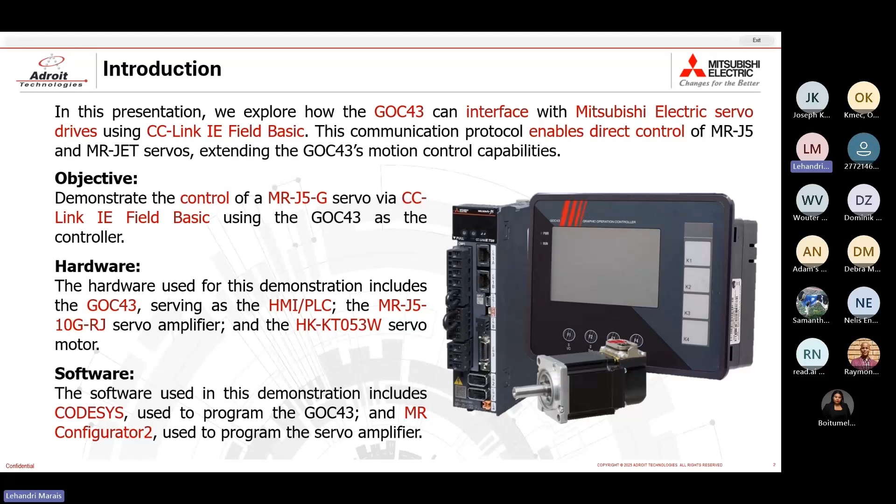The software that I'll be using today will be CODESYS and MR Configurator2, with CODESYS being used to program the GOC43 and MR Configurator2 used to parameterize our servo amplifier.

So just to give you an overview of the functionalities that we'll be adding to the demonstration today, we'll be adding the servo on command, jog forward and reverse commands of operation, home return command, positioning command via a positioning table. We're gonna be able to reset and clear alarms, and then monitoring things such as the position, operation mode, and alarms.

So just to start off with some overview on CC-Link IE Field Basic. CC-Link IE Field Basic is an industrial automation communication protocol that is based on standard Ethernet. It uses cyclic communication to transfer data between your master and your remote station using link devices. So link devices are basically just registers that are used to transfer or store the bits or registers that need to be transferred between the master and remote station.

On the right, you can see the diagram for the flow of data transfer of the link devices, and this will include your RX, RY, RWr, and RWw link devices. Your RX and RWr link devices are used to transfer bits and registers respectively from your remote station to your master station. So essentially it's reading from the remote station to the master station. Whereas the RY and RWw link devices are used to transfer bits and registers from your master station to your remote station.

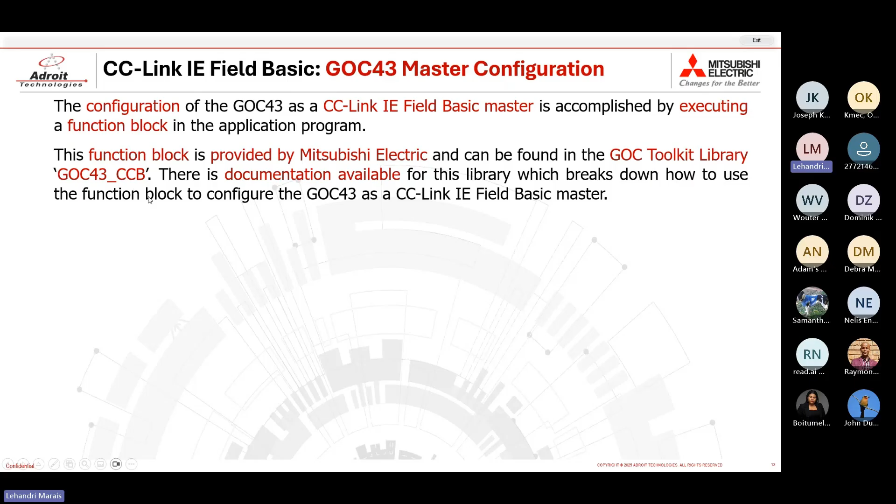So when looking at how to configure the GOC as a CC-Link IE Field Basic master, this is done via a function block. The function block is provided by Mitsubishi Electric within the GOC toolkit library, and it is the GOC43_CCB library. So in your install for CODESYS, you'll see the GOC Toolkit v3 folder in which you'll find manuals and library manuals. There you can also see the documentation on how to use this function block to configure the CC-Link IE Field master station.

So starting off, let's actually go over to CODESYS. Just give me a second.

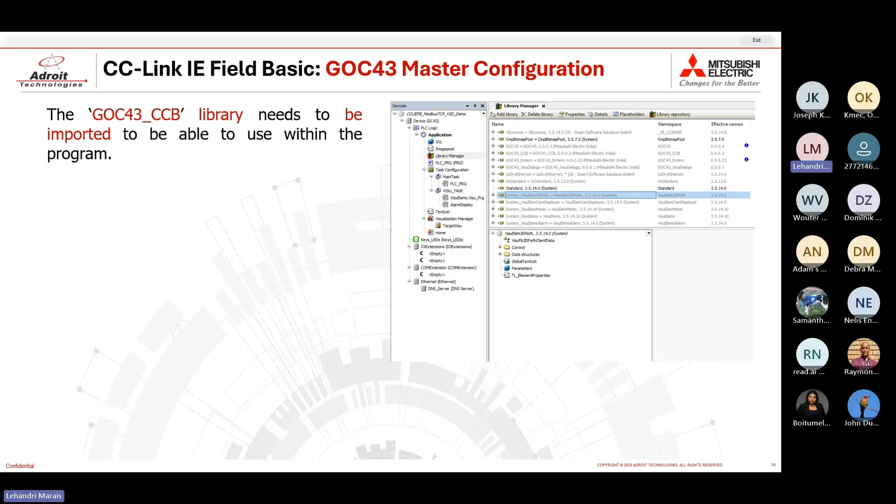Okay. So starting off with importing the function block, you open the library manager in your device tree, right click within the window, anywhere is fine, select add library, then this pop-up window comes up, go to advanced, miscellaneous, and then you'll see the GOC43_CCB library. This is the function block for the CC-Link IE Field Basic master configuration. Clicking OK will now import this to my program.

So once you have imported this to your program, you are able to use it within your program. So I actually have set up the configuration beforehand, as I will be going through the presentation breakdown as it's a bit easier.

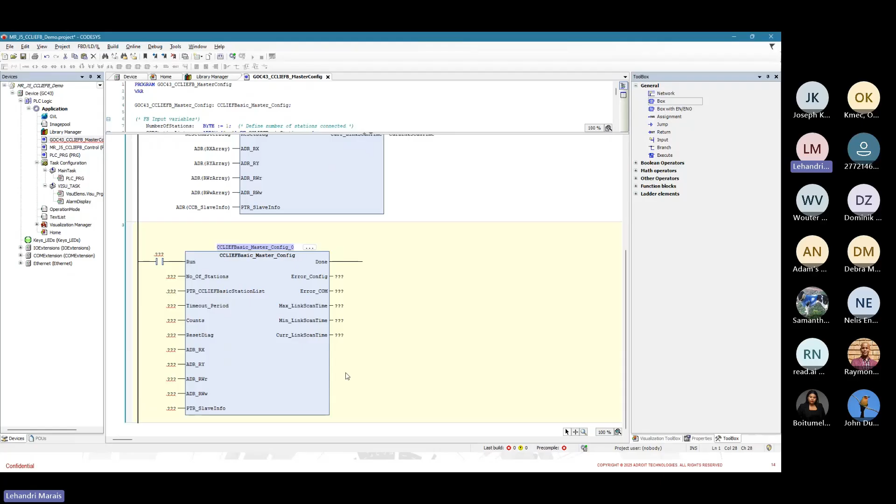But yeah, so if you do import your function block, you do it by dragging and dropping a box, clicking on the box itself, going to the action button, which brings up your input assistant, in which you can select the function blocks tab, and then you should be able to see the library that you have imported. So if I click OK there, I have now imported the function block once again.

Note, you only require one of these function blocks for your GOC43, as one of these function blocks can support up to 4 remote stations. So just quickly going back to the presentation. So this is just the steps for the library and adding the function block that I just showed you.

Now, looking at how to configure the function block, we start off with our inputs, and the first input being run. So this just enables the function block to set up the communication. Whenever this input is false, communication is stopped to all remote stations.

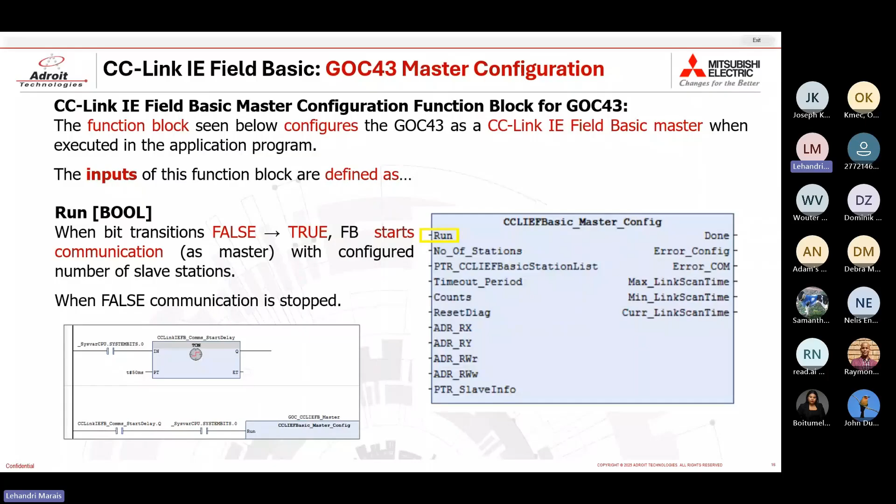Next is the number of stations. So this is where you set up the number of slave devices or remote stations that you are connecting to the GOC. As mentioned, the range is 1 to 4. Do not exceed 4, as this will cause errors.

Next is the CC-Link IE Field Basic station list. This also configures your stations, but this configures the IP address, or, well, more like the station number of each of your remote stations. So the way to declare this is via the array or a pointer to an array, the declaration which you can see at the bottom here.

So one thing to note about this input, the station number is equal to your remote station's fourth octet of its IP address. So if I look at, let's say, an example of 192.168.3.9 being the remote station's IP address, this will mean that I need to set 9 as its station number in this declaration. So that needs to be input into this input of the function block.

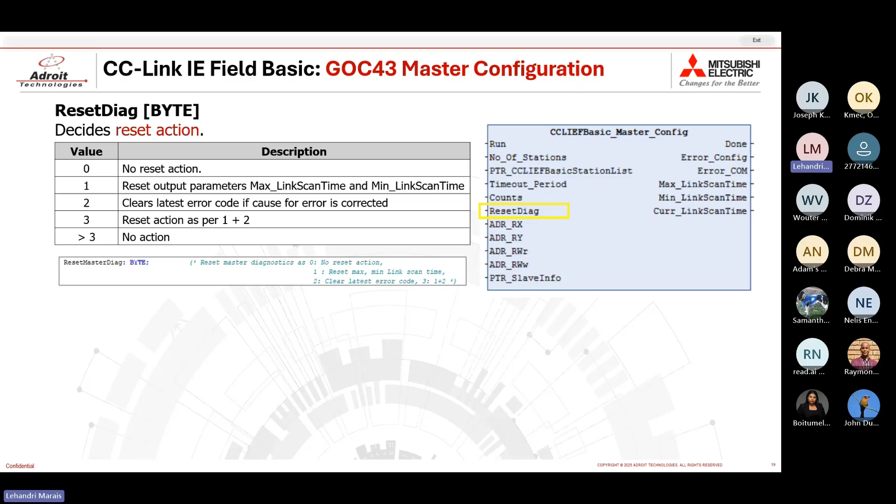Next is where you declare the starting addresses for your link devices. So if you recall, I mentioned that the link devices are declared by the user, and this is where you do it. So this declares the starting address of your RX, RY, RWr, and RWw. Now keep in mind that each of these have a set amount of link devices assigned per station. So if I have multiple stations, I need to leave enough space for my addresses so that all of these stations' addresses fit in the ranges that I set here.

So for instance, if I set my RX starting address as %MB3000, if let's say I have the maximum 4 connections, I need to keep space for 64 times 4 bits, which is pretty easy. But yeah, so that needs to be kept in mind for all 4 of these addresses. But for today, we only have one remote station, so that is not really a problem, although the addressing here is also declared pretty spaciously.

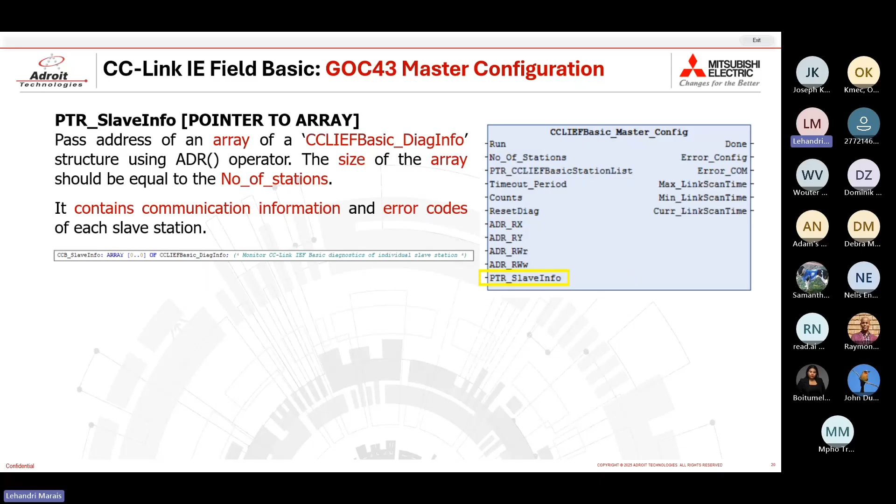Okay. Next is the slave info. So this is a pointer to a structure or array that stores diagnostics of the slave station, and some information as well. So this includes vendor code, model code, device version, slave local unit info. Yeah, quite a few things. It can store the error code. It can store comms error.

So you can use this information to determine which of your slaves are in error and determine whether you need to check any communication cables or the configuration itself.

Now, going to the outputs of this function block, the first is the done output. So this is a Boolean type output. And this is where you can see whether the configuration has been successful. So when this is true, the configuration has been successful, and when this is false, an error has occurred for the configuration.

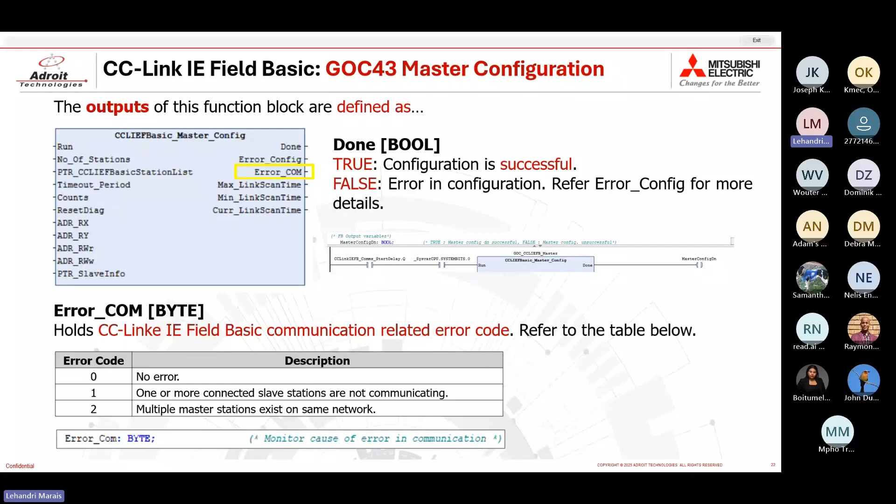Now, when an error has occurred, you'll see the error code in the error_com. So the error code will indicate what type of error has occurred. If error_com is 0, then no error has occurred. When it's 1, one or more connected slave stations are not communicating. And if it's 2, multiple master stations exist on the same network.

Now going to the error config. This also gives you a bit more indication on what error could have possibly occurred for the done output to be false. So the first option for this is 0, no error. 1, station number is invalid. So that means you've selected a station number out of range. 2, address overlaps or out of memory area assigned marker memory.

If the error code is 3, the number of slave stations or number of occupied stations is out of range. 4, same station number configured for more than one slave. So that means most likely you also have a duplicate IP address for 2 of your slaves or remote stations. When it's 5, your master station IP address matches with one of the slave stations. 6 to 7 is reserved.

8 means that the count value is anything else other than 3, 5, or 10. And 10 means that the master function block is already configured. So that means you have configured more than one master block for your GOC.

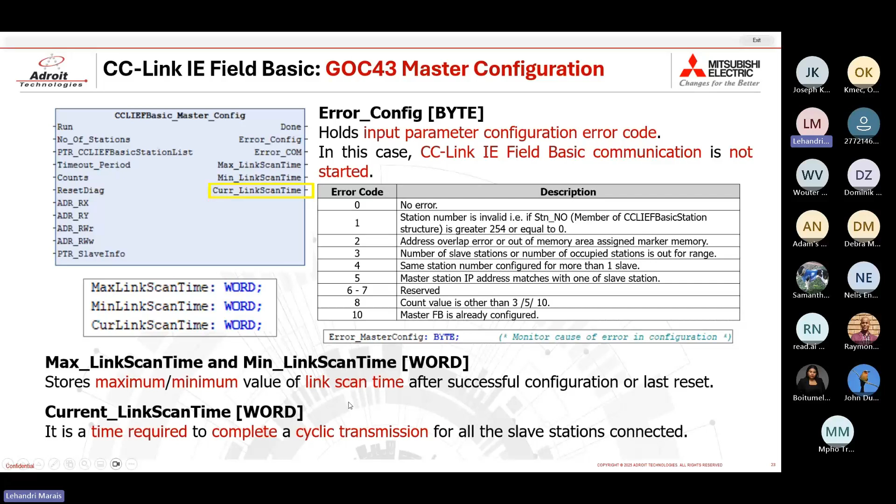So when declared, this is approximately how your variables declaration for the function block should look. And this has all been done within the last few slides. And this is approximately how your function block should look when configured.

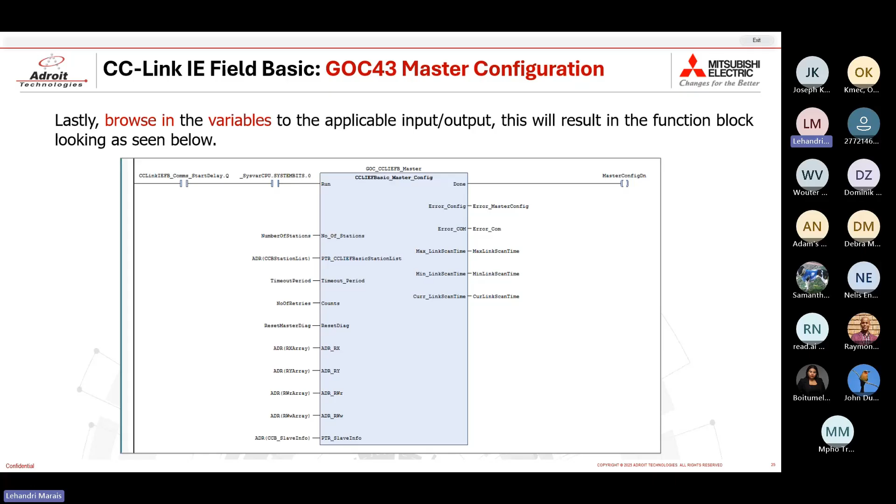Okay. So now that we've discussed the configuration for the GOC for CC-Link IE Field Basic, let's look at the MR-J5. So as stated, we are using the MR-J5-10G-RJ servo amplifier for this demonstration. And this servo amplifier forms part of the MR-J servo range, which is one of the newest ranges. The G-type servo amplifier of this MR-J5 range supports CC-Link IE TSN as well as CC-Link IE Field Basic communication for the servo motor control.

So the G-type MR-J5 servo amplifier comes in a 1, 2, or 3 axis configuration, but just a special note for CC-Link IE Field Basic, there's only a single axis available. And if we look more into the exact model being used for today's demonstration, the servo amplifier is a single axis servo amplifier that has a rated output of 0.1 kilowatts. You can see the model designation on the right hand side.

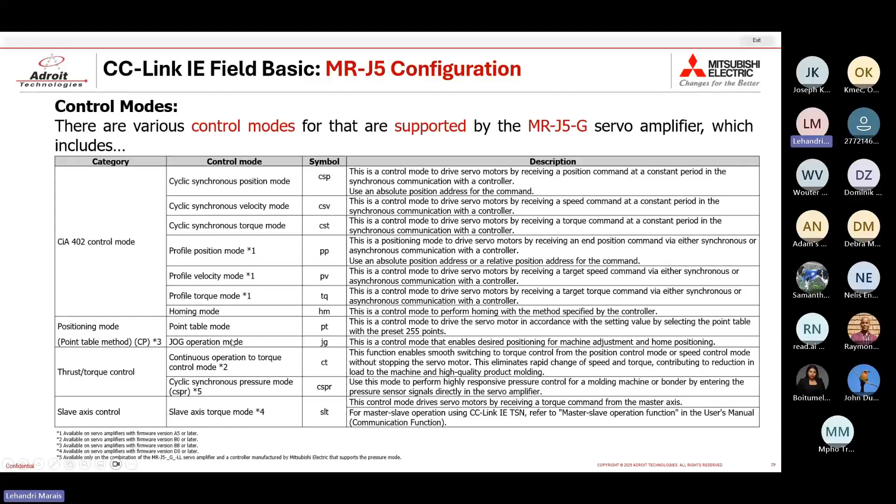You won't be able to use those in your operation. So when it comes to control modes that the MR-J5-G does support for CC-Link IE Field Basic, this includes the profile position mode, the profile velocity mode, profile torque mode, homing mode, point table mode, and jog operation mode that you can see here.

Now, the servo amplifier uses parameters much like a VSD to configure its operation, and this is done via MR Configurator2. So before we go on, just gonna quickly open MR Configurator. Okay.

So when it comes to the network parameterization for the MR-J5-G, we will have to look at setting the IP address, subnet mask, network protocol setting, and in some cases, the communication speed. This is because this determines the characteristics of communication between your controller and your servo amplifier, in which case we want to set CC-Link IE Field Basic. We need to set an IP address as well as a subnet mask.

So for the IP address, there's actually two methods of setting your IP address. The first being the rotary switches on the front display of your servo amplifier, which you can see an image right here. So switch 1 and switch 2 can be used to set the fourth octet of your servo amplifier IP address, with octets 1, 2 and 3 being taken from the parameter of the servo amplifier, which by default is usually 192.168.3.1. So one thing to note, if both your rotary switches are set to 0, the default IP address within the parameter will be used.

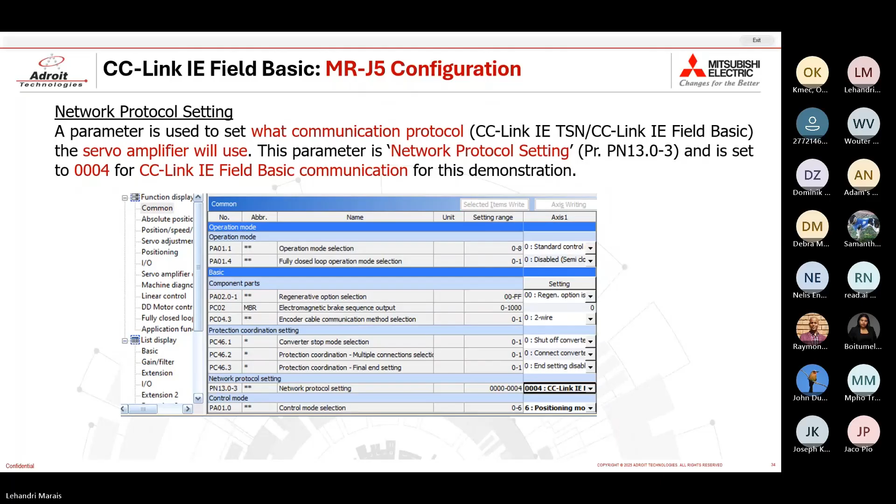So the next parameter that needs to be set is the network protocol setting. This is where we set whether to use CC-Link IE Field Basic or CC-Link IE TSN. Now this is set in parameter PN13, bits 0 to 3, and to do this you need to set 0004, or if you just go to your parameter list common, you should have this option under network protocol setting where you are able to choose between the two. So the protocol set for this will be CC-Link IE Field Basic.

So the communication speed setting parameter is actually not necessarily applicable for this demonstration, but it's important to keep in mind when using CC-Link IE TSN, as this determines whether you're using 100 megabits per second or 1 gigabit per second communication speed when using TSN. But for CC-Link IE Field Basic, regardless of the value of this parameter, it will stay at 100 megabits per second.

And just a note, whenever any of these parameters have been changed, the parameters need to be written. So first go online via an Ethernet or USB connection to the servo amplifier and click on switch online/offline, and then select axis writing, which will then write the parameters to your axis. Once the writing has been completed, cycle the power of the servo amplifier for the parameter changes to take place.

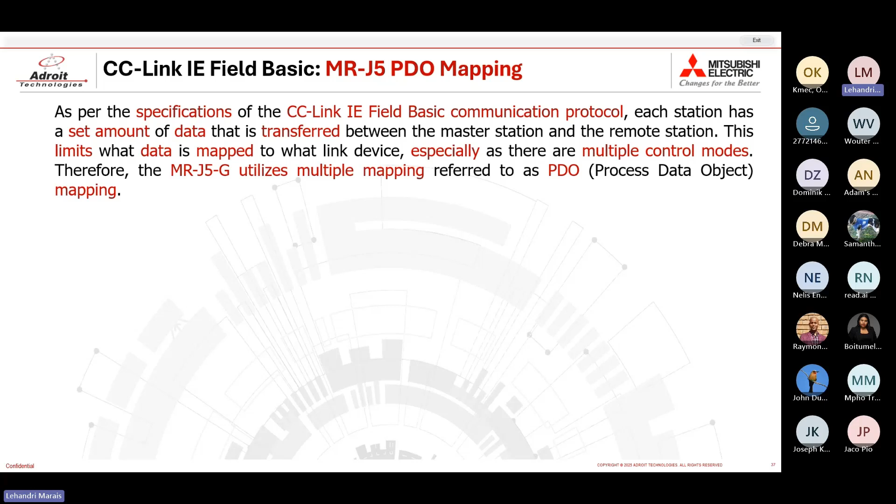So next, we're going to look at the MR-J5 PDO mapping. When I say PDO mapping, this is how the link devices for CC-Link IE Field Basic are mapped for the MR-J5. So this looks at the mapping of RY, RX, RWw, and RWr. For your RX and RY link device mapping, this stays constant no matter what control mode or operation mode you choose. But the RWw and RWr mapping changes depending on the control mode or operation mode that you choose. And we'll be going through the different types in a second.

But first, looking at RY and RX, RY is mainly used to start the cyclic communication. So you'll see RY, in this case 3F for a single station, is your cyclic communication ready command. Whereas your RX 3F will be the cyclic communication ready status. So that's what you'll be reading from the remote station, or the servo amplifier in this case.

Now, to go on to the RWR and RWW link devices, as I said, these do change depending on what is set in your control mode selection parameter and your default mapping mode selection. So these are two parameters in your servo amplifier that determine what control mode you are able to use and what mapping mode selection. So to give a bit more clarity, your control modes that are available for CC-Link IE Field Basic are the network standard mode and the positioning mode or point table method.

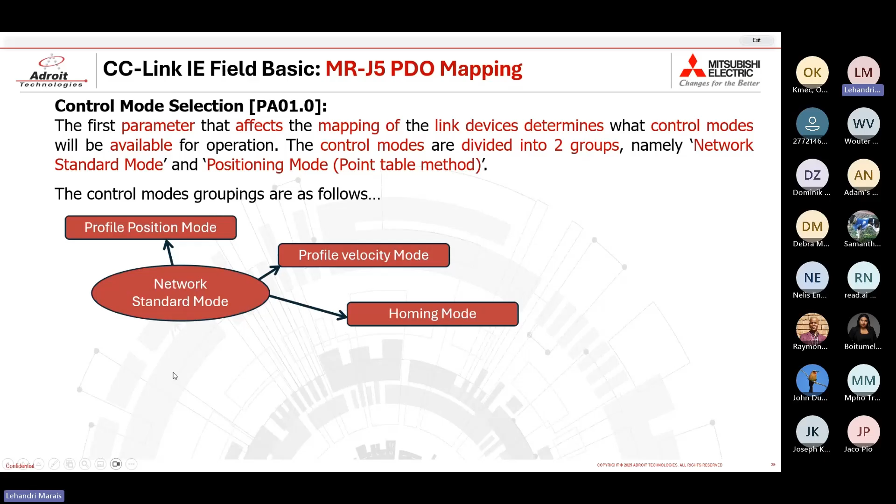And next, the default mapping mode selection determines whether you are using 2 touch probes, 1 touch probe, or 1 touch probe and an input device. So that ultimately determines how your link devices are mapped. So when it comes to your control mode selections, how your control modes are grouped within these two categories, you have once again your network standard mode, which allows you to do profile position mode, profile velocity mode, homing mode, and last but not least, profile torque mode.

Now, the other category is the positioning mode. This allows you to do jog mode, homing mode, and point table mode. So only one of these two groups can be set on the amplifier at any given time. So whatever you choose, you are limited to the control modes that group has access to. So how this actually works is you can change between these two groups during operation via an SLMP signal.

However, this is something that the GOC does not support, but if you are, let's say, using the FX5, you will be able to switch between these two modes. But for the GOC application, this is not possible. So you will need to choose one of these two modes for the operation that you want to perform. And then, as I said, the default mapping mode is just to determine what peripherals or input devices or probes you have connected to your servo amplifier.

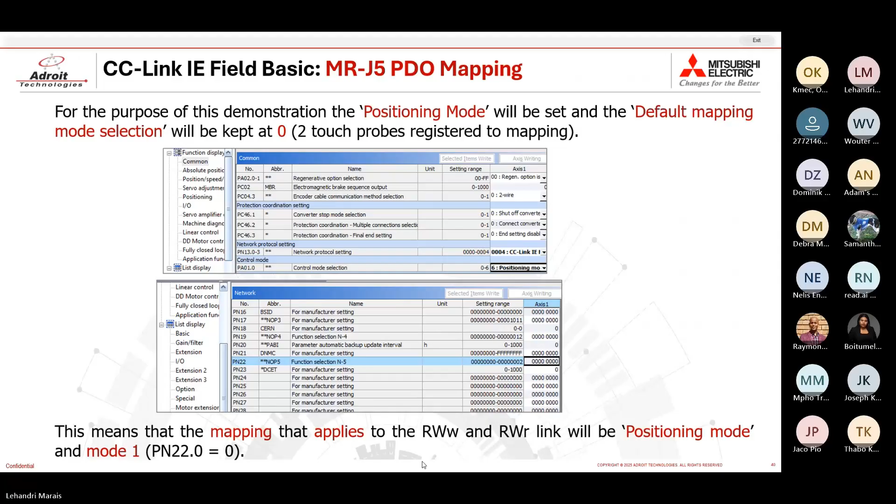So now looking at what this means for our mapping, and just note that this is specifically for positioning mode, for mode 1. And I'll show you in the manual as well that there are various tables just like this one. So when it comes to the RWW PDO mapping, we have register 0 being the modes of operation, register 1 being the control word, and then we have some control digital inputs. Register 6 is your target position, which is something that will be used quite a bit. Register 8 is the target velocity.

Then you also have your velocity limit value, your target torque, profile velocity, profile acceleration, profile deceleration, torque slope, and so on and so forth. So this is important to know because these are the actual registers that you'll be using within your PLC program. When it comes to the RWR PDO mapping, you also have a modes of operation display, so you can monitor what mode of operation the servo amplifier is currently in, and then you have your status word. And just looking at what we'll be using today, the position actual value, so you can track what position your servo motor is in, your following error actual value, your current alarm, and so on and so forth.

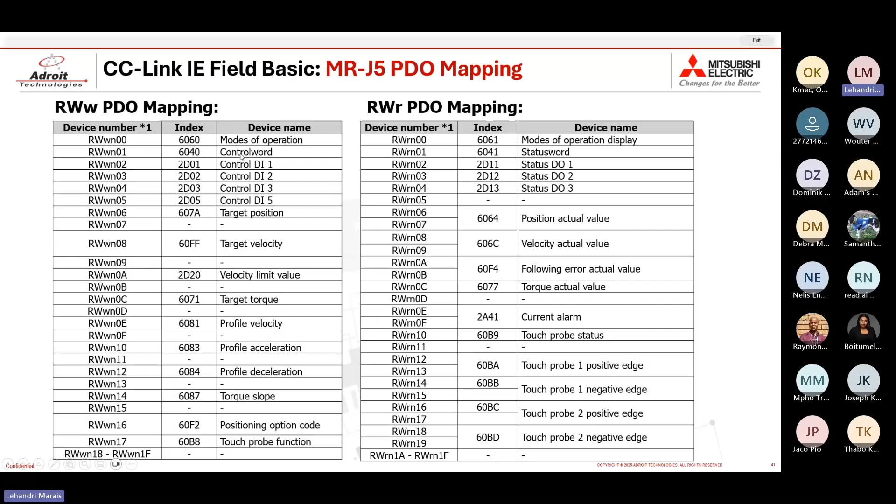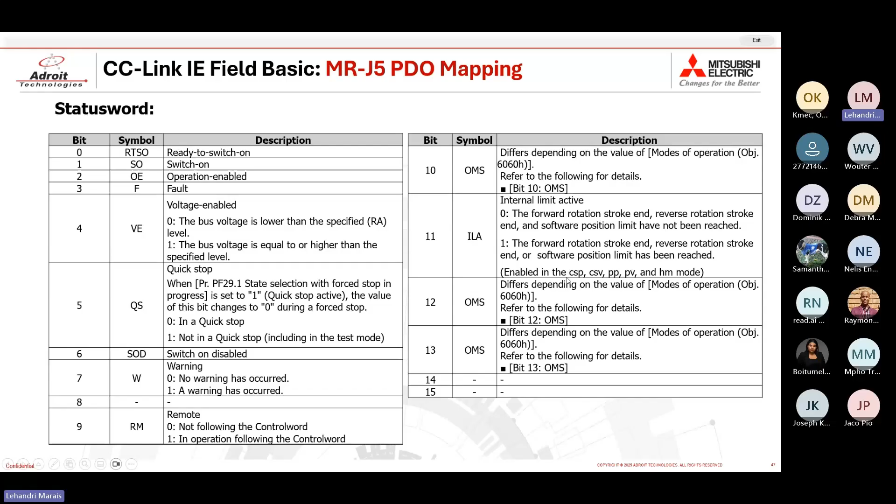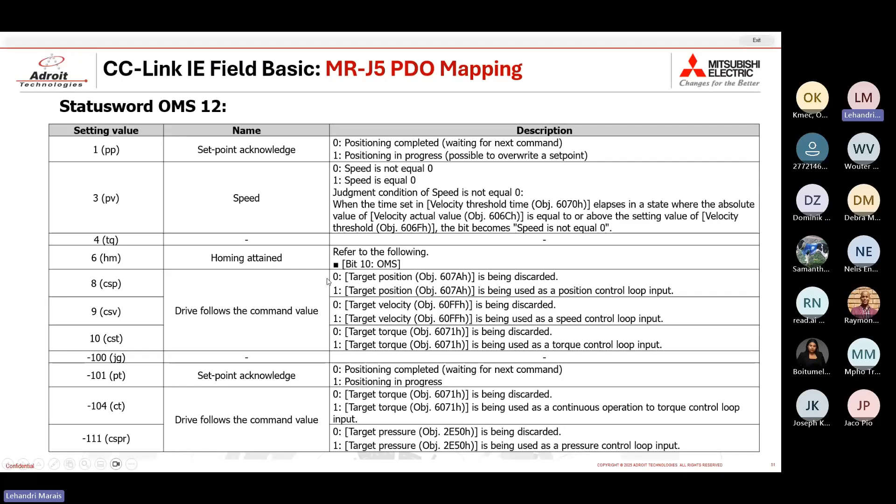Okay. Same for operation mode specific bit 12 for your status word. When looking at the point table method, this indicates whether the set point has been acknowledged, and this is not applicable for jog, but it is applicable for homing, which depends on the information you see in operation mode specific bit 10. Okay, so that is the configuration for both your PLC and the servo amplifier for CC-Link IE Field Basic.

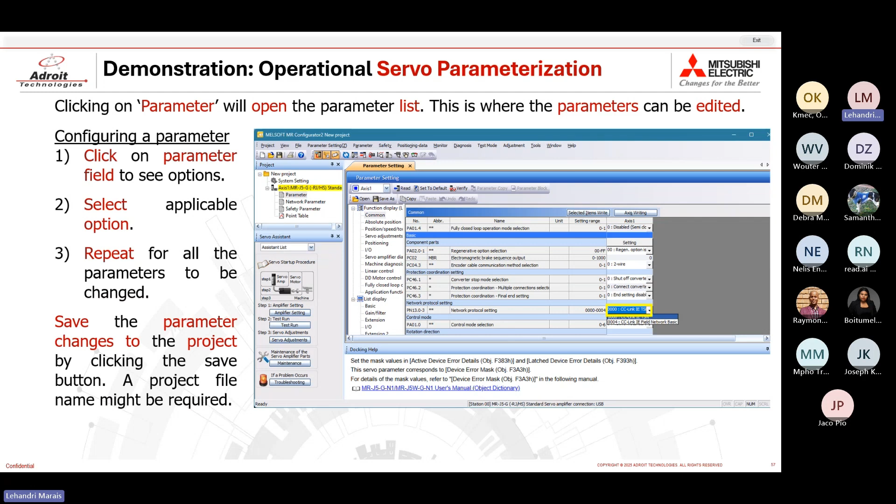Now, starting to look at the demonstration, we'll look at some of the servo parameters that don't necessarily affect the CC-Link IE Field Basic communication protocol, but that are necessary for your servo to operate as you intend it to. Now, obviously, this is very much dependent on the application that the motor is going to be used in. So the parameters that I set here will not necessarily be used for all applications.

So the first parameter that will be set is the forced stop parameter. I do not have a forced stop wired into my servo amplifier, meaning that I need to disable this functionality, and this is done by setting disable in parameter PA04.2 and PA04.3. So if I go to my MR Configurator, you'll see that the forced stop selection is disabled in both 4.3 and 4.2. If this is not done and there is no forced stop wired in, the servo amplifier will remain in an error state.

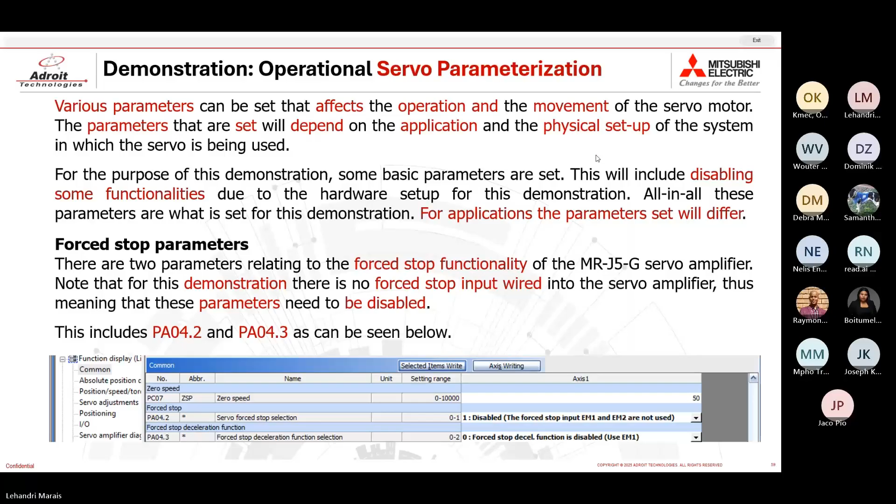Next is the operation mode selection. You have three types of servo motors: a standard rotary servo motor, a linear servo motor, and a direct drive servo motor. For this demonstration, we have a standard rotary motor, and this parameter is where you set what type of motor you use. So in parameter PA01.1, we keep it on the default, which is standard control. If I expand, you can see you are able to choose between linear, direct drive, or standard control mode.

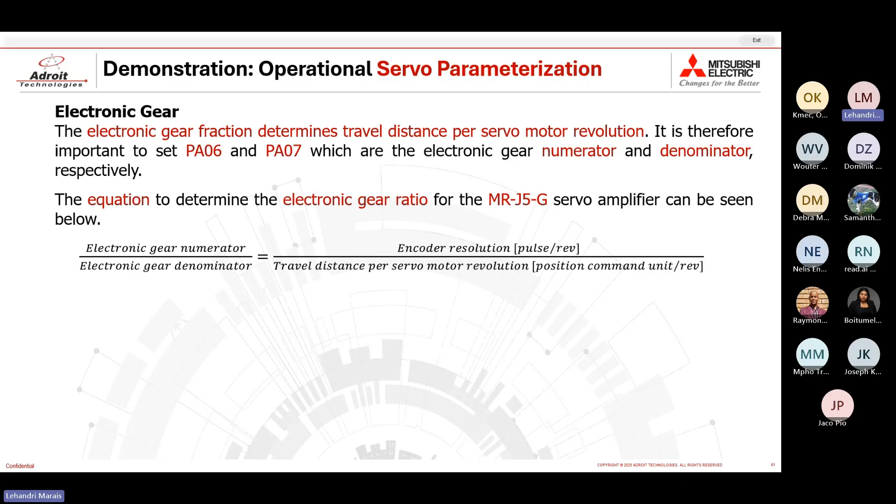One of the more important parameters to set is the electronic gear parameters. So this will be your electronic gear numerator as well as the denominator, which is parameter PA06 and PA07. Now, your electronic gear ratio determines the travel distance per servo motor revolution. So this is important to set how you would like it to function.

Now, the equation used to determine your electronic gear ratio can be seen. It's the encoder resolution over the travel distance per servo motor revolution. So one thing else to note on this, the unit in which your travel distance is measured will depend on what is set in parameter PT01.2, as this determines the unit for position data.

So for this demonstration, we are currently using pulses. But you are able to set this in millimeters, inches, or degrees. So your gear ratio will also depend on what you have set there.

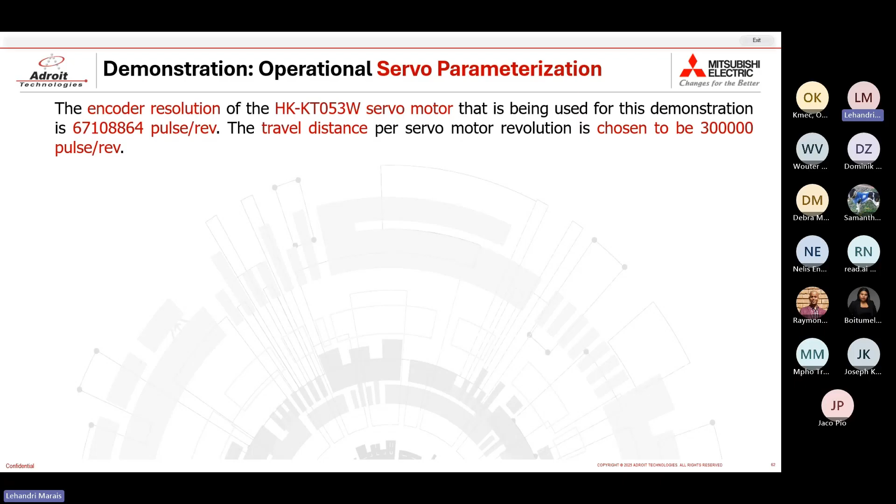So the encoder resolution for the motor that's been used for this demonstration is 67,108,864 pulses per revolution. And the travel distance for a full motor rotation that is chosen is 300,000 pulses. This means that for every 300,000 pulses that I give my servo motor, its axis will rotate once, thus meaning that my electronic gear ratio will be as follows, as you can see on this screen.

And this is set in PA06 and PA07, which if I just show you, yeah, right here. So that is the electronic gear ratio.

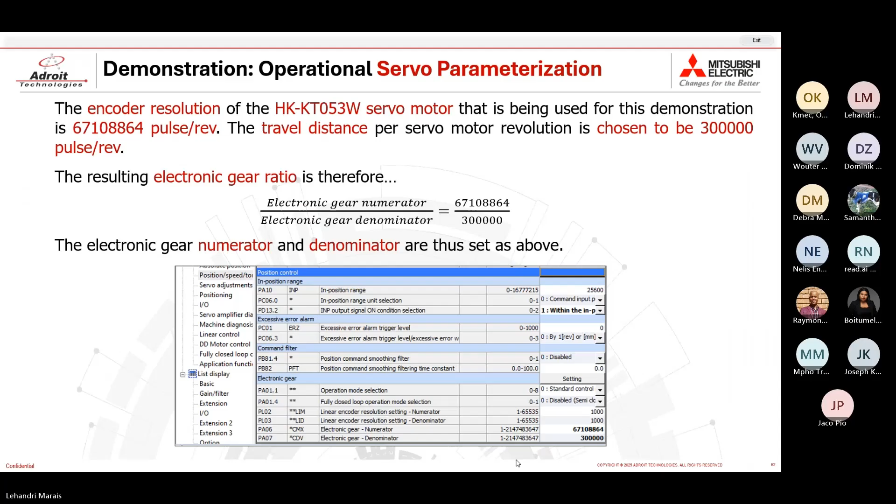Now, there is a parameter that relates to how the homing method works, and this is parameter PT45. For this demonstration, it's set to -3 data set type, which means that the homing is done without a dog, as I don't have any dog proximity sensor connected to the servo amplifier. And this also means that when the home position command is executed, the current position is set as the home position. Also, just to show, this is set right here.

So there actually are quite a few options for this, and it will also depend on what peripherals you have on your servo amplifier. Now, if you are ever working on MR Configurator and you're not sure what the different parameter settings mean, you also have a docking help at the bottom. So whatever parameter I do click on, I can go read up more on the different options for settings for this parameter.

So last but not least is the in-position output signal on condition selection. This determines under what condition the in-position signal turns on, which for this case will be set to 1, meaning within the in-position range and at completion of output command. So this means my in-position signal will turn on when it's within a certain range of my position, as well as the completion of the output command itself.

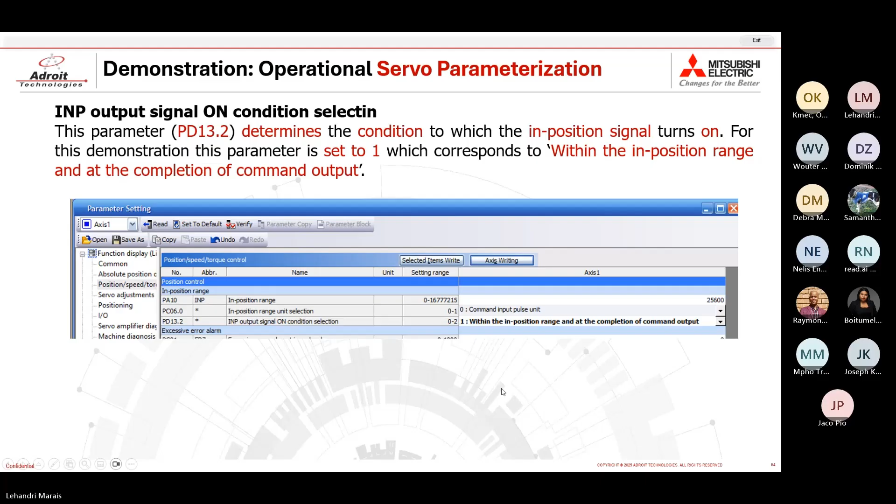Now, as I mentioned, the control mode that we'll be using for today's demonstration will be the point table. So this means that the point table needs to be configured as well. So to access your point table, go to the project tree in the project window and double click on point table. This will open this interface you see right here.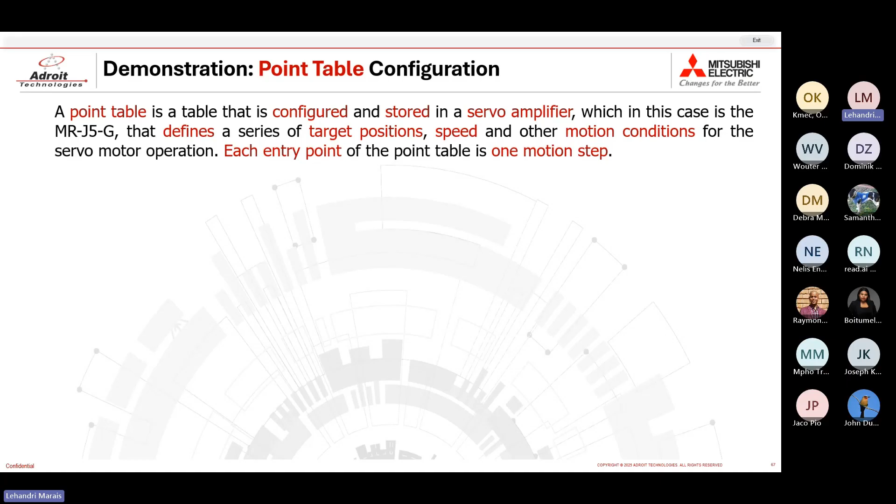So a point table is configured and stored within your servo amplifier, and this point table defines a series of target positions with speed and motion conditions that determine the servo motor operation. Each entry point or each row in the point table is one motion step. So I did show you where to access the point table in MR Configurator, which you can also see here.

Now, looking at what you configure in each of the columns of your point table. The first is your target position. So this is the position that you want the servo motor to move to, so the axis to turn. This, once again, will be in terms of pulses, as this is what has been set in my parameters.

So if I look at the first entry here, I am instructing the servo motor to rotate 100,000 pulses in the positive direction or forward direction, which for this setup should be counterclockwise. I do mention this a bit later on, so we will get to that as well.

The second column sets the speed of the operation. So if I once again look at entry 1, moving this 100,000 pulses, the servo motor will move at the speed of 100 RPM. Next is the acceleration time constant. This determines how long it will take the motor to reach the speed that is set in the speed column.

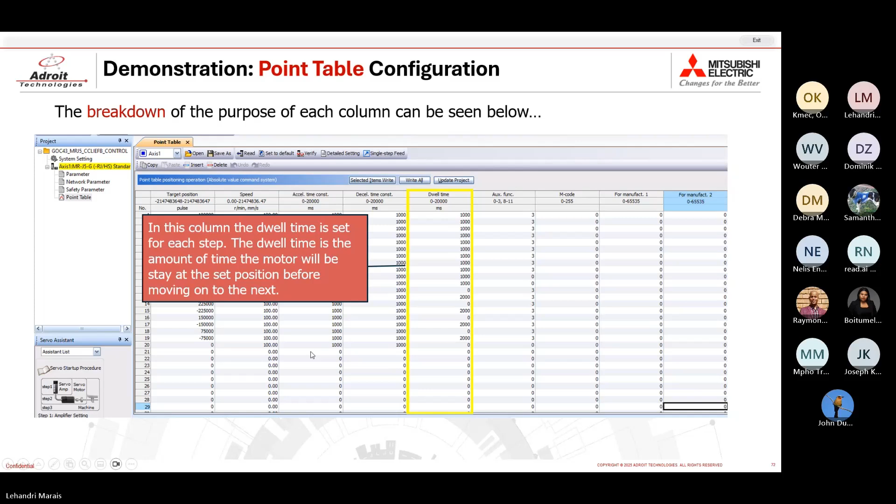Second last is the auxiliary function. The auxiliary function determines the motion operation, whether it continues or stops at this entry. So if I look at my setup, when using the point table in absolute position command method, which is what we are currently doing, when setting 2 as your auxiliary function, operation is performed in accordance with a single point table selected. This means only one position or point will be executed at a time, so it will not automatically go on to the next point.

With 3 set, it automatically moves to the next point without me having to input anything else. The same for 10 and 11, although there are slight changes between them. The last column that you can edit is the M-code. This is basically where you set an M-code for the table or row entry.

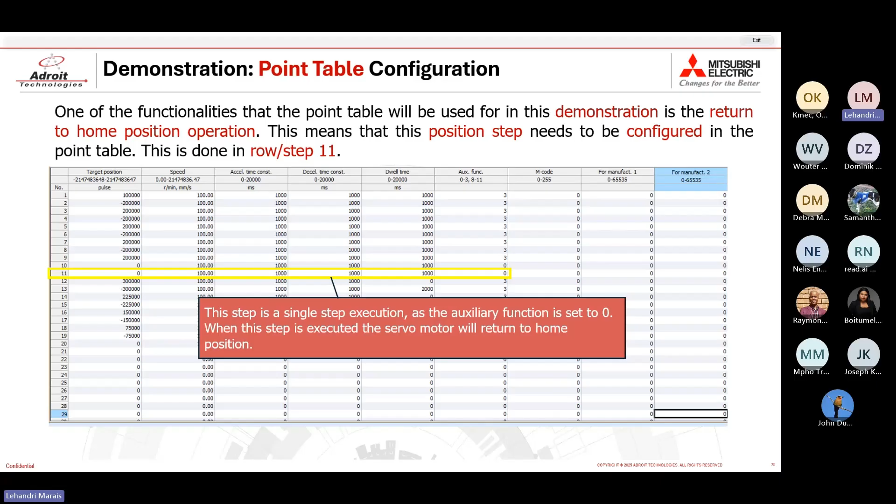1 second as well. And as you can see, the auxiliary function is set to 0, meaning that only the single step is executed. So only step 11 will be executed when instructed to execute step 11.

Next, looking at the sequences. Sequence 1 is configured from step 1 all the way to step 10. The first instruction is to move 100,000 pulses in the positive direction, and the next one is to move 200,000 pulses in the negative direction. The motor operation keeps oscillating between these 2 positions. With step 10, I'm ordering it to go back to the home position.

Each of these steps is set up with a speed of 100 RPM, acceleration time 1 second, deceleration time also 1 second, and the dwell time between each step 1 second. This means that after every step, the servo motor axis will pause for 1 second. The auxiliary function is set as 3 for steps 1 to 9, meaning that after the step has been executed, it will automatically move on to the next until it gets to 10, at which point the auxiliary function is 0, so it will stop at that step and wait for a new instruction.

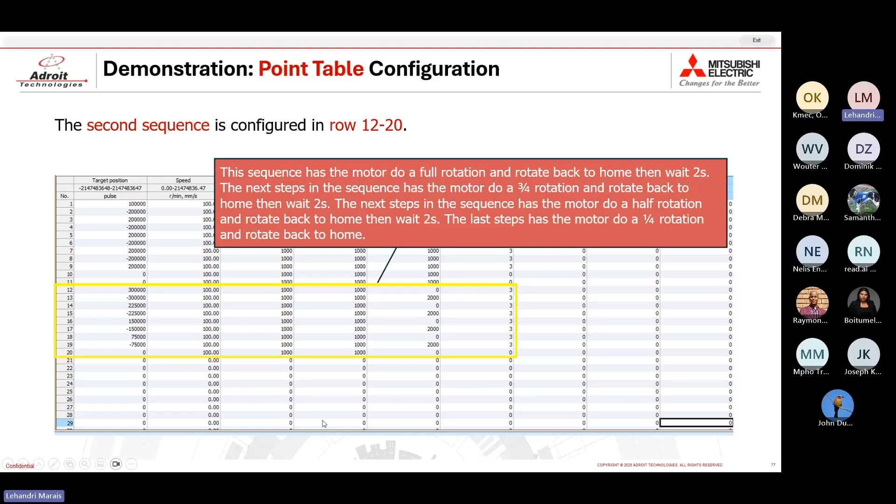But whenever you set the last position, so when it doesn't automatically move to the next position, as you see for the last position, then it moves to the exact position, it doesn't just move by the amount of pulses that you've set in the target position. I hope that makes sense. Okay, so that is the point table configuration.

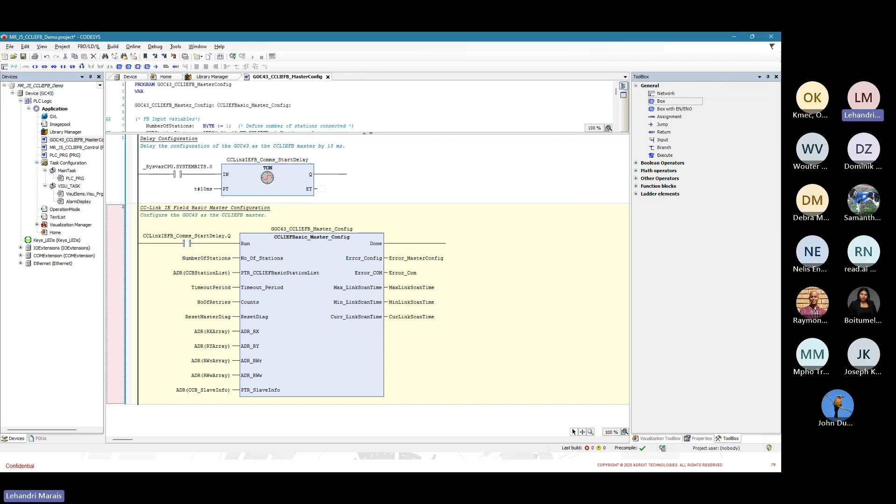So now we'll start looking at the PLC program, at which point I will be switching over to CODESYS and doing the programming alongside. Okay, so I have already created a CODESYS project for the GOC43 and did the CC-Link IE Field Basic configuration.

I also created POUs to use for this demonstration, which are called within the main task. So that means that it actually executes in the scan time of the GOC43. So the CC-Link IE Field Basic control will be done within this POU, where I also declared some variables. Now, just to point out, let's zoom in a bit. As you can see, I have declared variables for the link devices, just for ease of use.

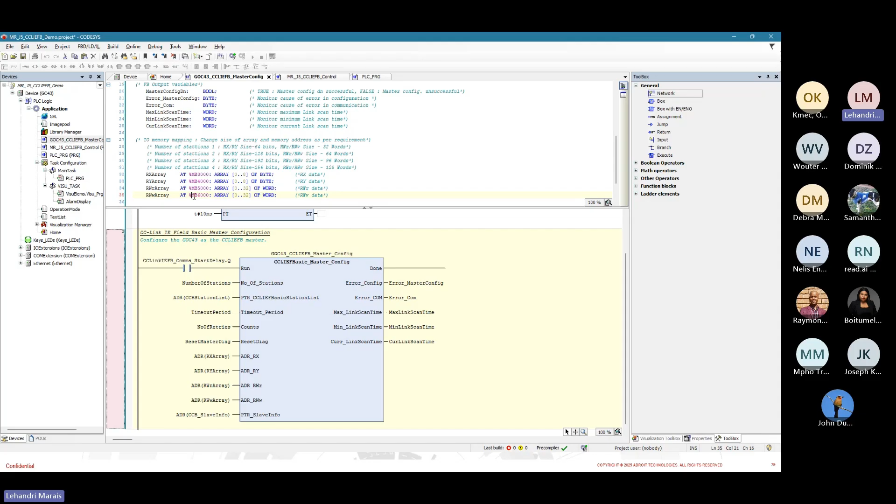So I've gone and declared the variables per that declaration, starting point, and per the mapping. So if I can quickly just show you the manual. This is the mapping that I showed you previously in the tables. So if I quickly take a look at my positioning mode, mode 1, I can see that the first register for my RWW is the modes of operation, which I've set there. And this is set as marker memory area byte 6000.

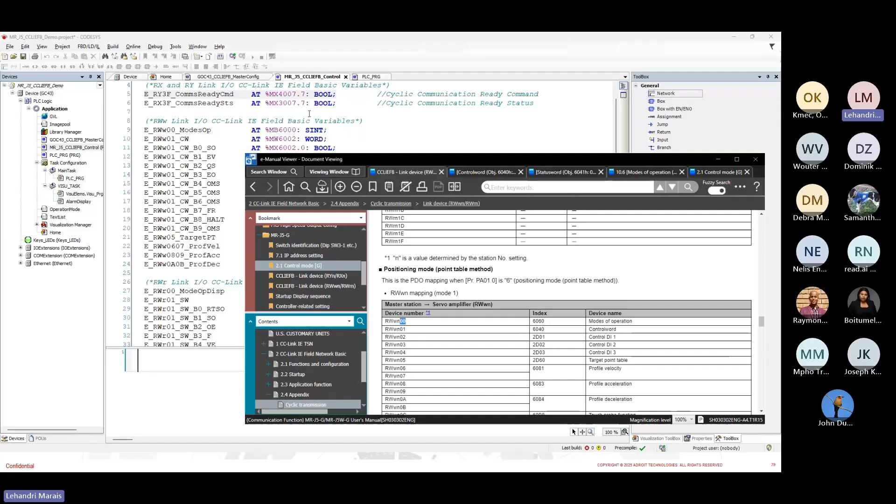Now, one thing to note, CODESYS works in octal or bytes. So one word will take up MB 6000 as well as MB 6001. So the addressing needs to skip or increment by 2 for every one of these registers. Now I've gone and declared the mapping in the applicable addressing and also set out the control word here as well as the status word here.

And these are the variables that will be used. I've also set some control input and output variables for the HMI functionality. So the first step to programming or setting up the control of the MR-J5 is to start the cyclic communication. This is done by turning on RY3F of the link devices.

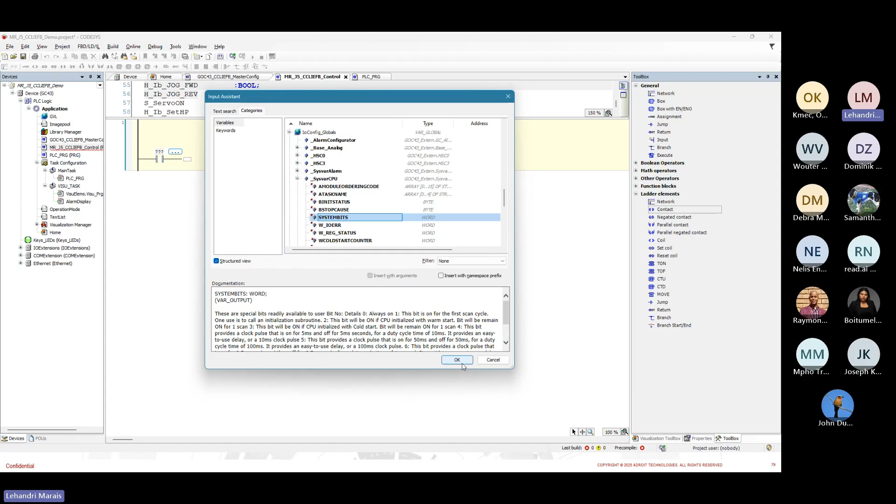So to do this, I'll be initiating the cyclic communication on the startup of my GOC. I drag and drop my contact, go into my input assistant, and then navigate to my system variables, in which I have the functionality of an always on bit. This is in the SysVar CPU system variable in the system bits. So selecting that and then indicating that I want to use bit 0, as this is the always on bit of this system variable.

So next, setting the cyclic communication command to be on when the GOC is running. So this is RWW01 control word. Sorry, it's RY3F, the ready command or the cyclic communication ready command. So that sets up the cyclic communication. So this is my start cyclic communication.

And basically what this is doing, it starts the cyclic communication as long as the GOC is running. Okay. Now that the cyclic communication has started, we are able to give commands, so control commands to the servo and servo amplifier. So the next step is to turn on or give the servo on or enable operation command.

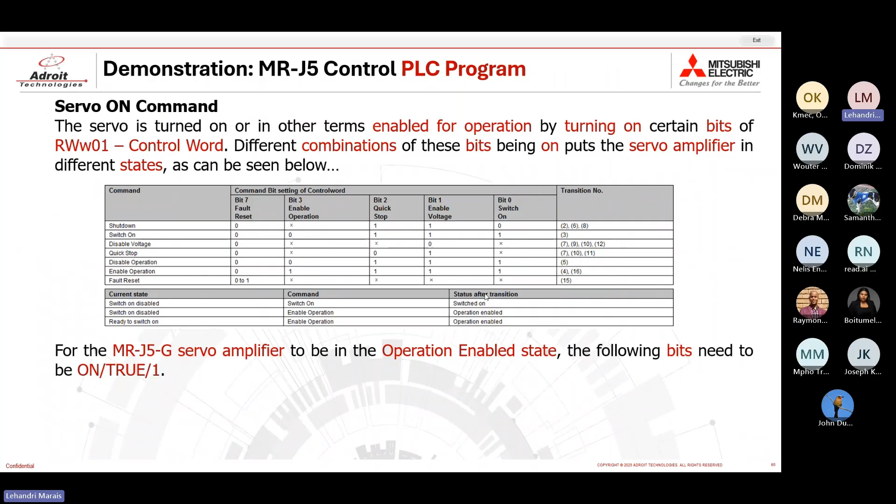Now, as we want to display whether the servo amplifier or the servo motor is indeed in the servo on or enable operation status, we'll look at the bits that need to be on for the servo to be in this status. So let me quickly just go back to the presentation. So for the status of the servo amplifier to be in operation enabled status, bits 0, 1, 2, 4, and 5 need to be on.

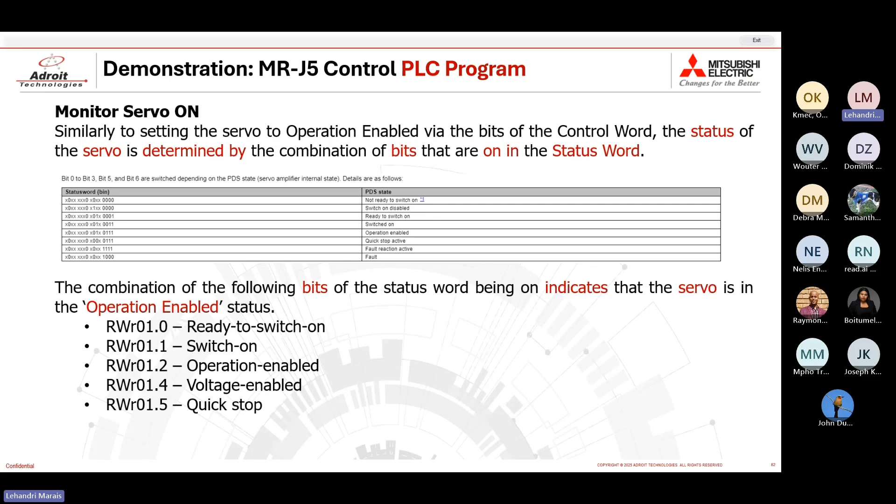So, oh well, yeah. These are all the bits that need to be on for the servo amp to be in operation enabled status. So to confirm this, we'll look at those bits. Okay. So once again, I'll be using my cyclic communication status, and then I'll be adding an AND, as I need all of those bits to be on. So, apologies. And I am looking at 5 bits, so I'll be appending the AND block to have 5 inputs.

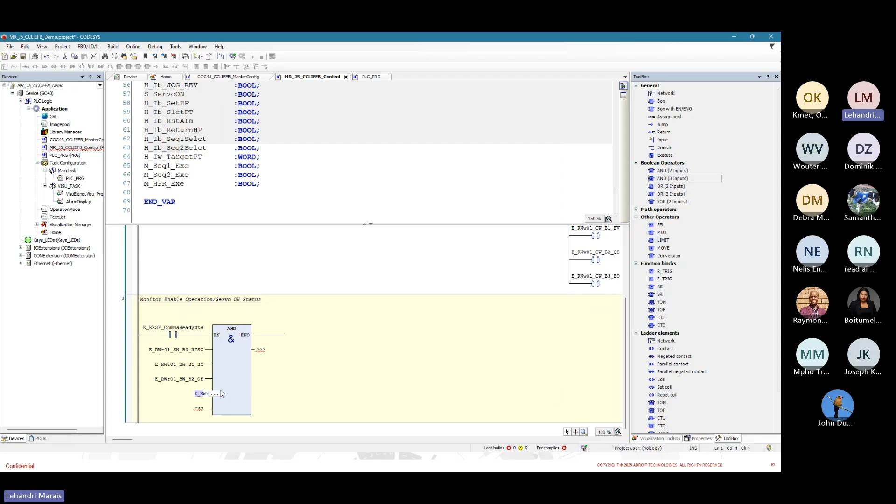So the first one I'll be looking at is the ready to switch on bit, which is bit 0 of the status word. Next is bit 1, which is the switch on status, which is bit 1 of the status word. Next is bit 2, operation enabled, which is bit 2 of the status word. Bit 4, which is the voltage enabled status, bit 4 of the status word, and then last but not least the quick stop, which is bit 5.

So when all 5 of these bits are on, this means my servo is in the operation or enable operation status, in which case I would like to turn on my status servo on.

Okay. Now that we can see whether our servo amplifier is in the operation enabled status or mode, we can start looking at adding operation mode functionality. So the first one that we'll be looking at is the jog operation mode. Now, before being able to actually program or add the jog operation, we need to start looking at setting the profile velocity, the profile acceleration, and the profile deceleration.

So if you recall, in the point table, all 3 of these are set within the point table. But for the jog operation, the values used are actually in the link devices, which you can see here. So it's register 06 and 07. So these values are all double words, meaning they actually take up 2 registers in the GOC memory.

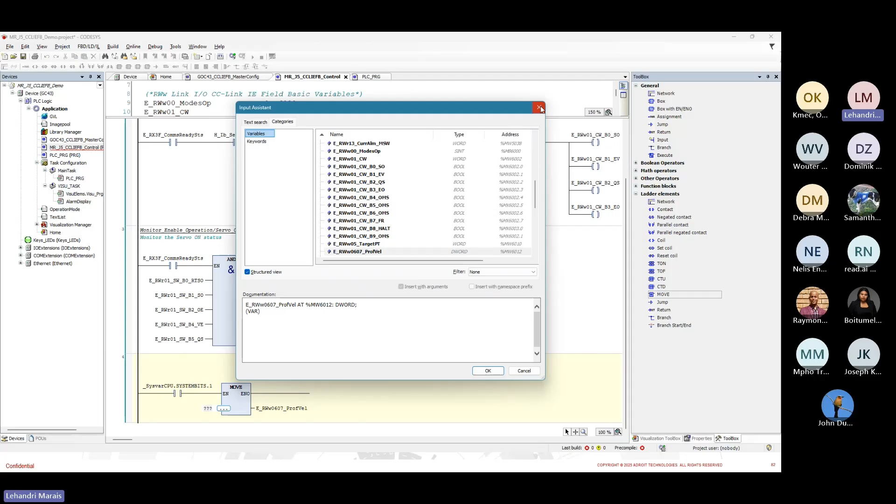And then let's set a value. So if I set 1,000 here, this actually equates to 10 RPMs, as we don't want our jog speed to be too high. So setting 1,000 in the profile velocity means that the actual movement of the servo axis will be at 10 RPMs.

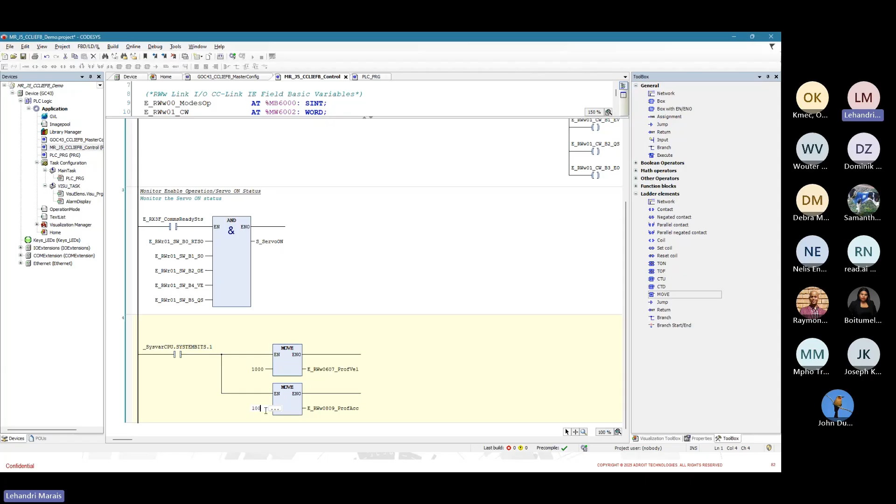Next, the acceleration and deceleration set at 200, which is 2 seconds. And basically, the acceleration and deceleration will be set to the same value.

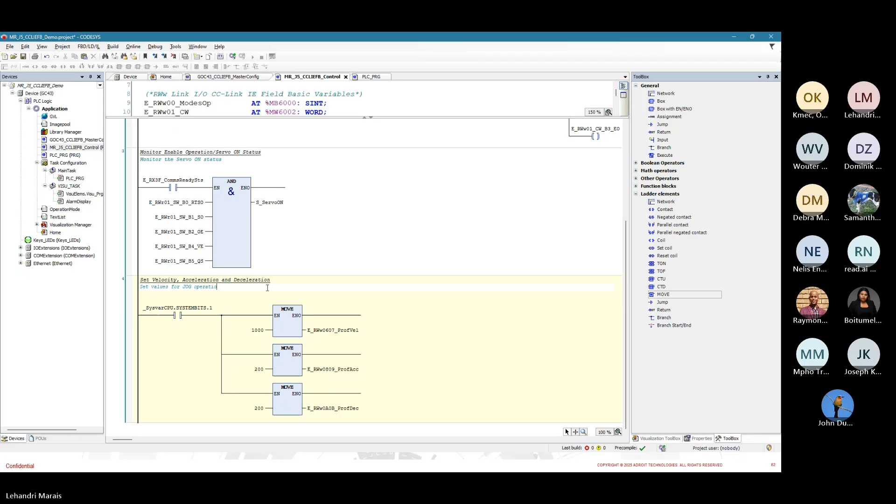So once the GOC starts up and starts running, these values will be set in these link devices, and this will determine at what speed the jog operation will take place. So yeah. Now with these values set, we can start looking at the actual jog operation, how to command the servo to move in the jog mode.

So the first step is to actually tell the servo amplifier that you want to operate it in this jog mode, which I will quickly be looking back to the presentation. The servo amplifier uses a link device called the operation mode, which is actually register RWW00, which you input a value that tells the servo amplifier what mode you want to operate it in. So in the case for jog mode, you set this value to -100. So that would be the first step.

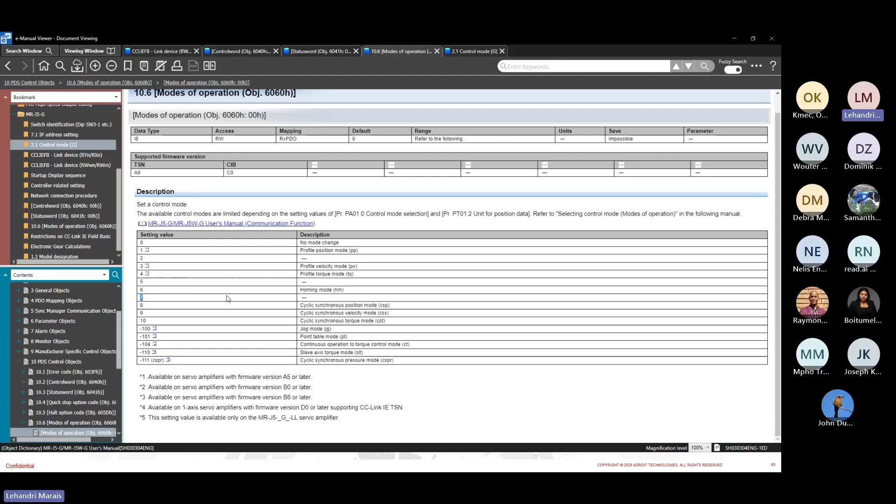So when I select jog mode via the HMI button that I'm going to set up or have set up, I would like to move the value -100, as this equates to the jog operation mode, which, apologies for the back and forth, but if I quickly go to my manuals, modes of operation, you can see all the values for the different modes of operation. So for the jog mode, it's -100. For the point table method or mode, it's -101. And for the other function that we'll be using, homing, it would be 6.

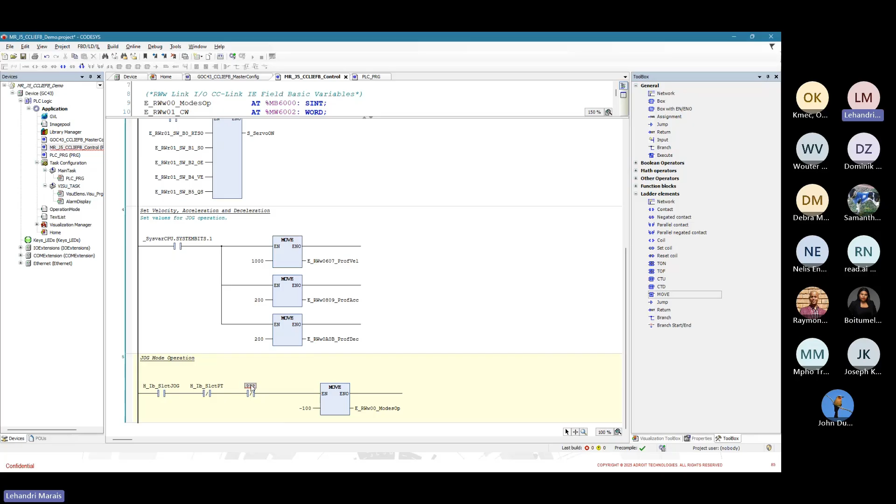Okay, so -100, and that is moved into RWW00 mode of operation. Now, I will be adding some interlocks here to stop more than one operation mode being chosen at a time. And this will be point table method. I do not want it to operate when jog is selected, or jog to operate when one of the others are selected. Let's insert another, and then also

this one. Okay. So now I have set the operation mode as jog. However, the movement commands still need to be added. So if you recall, looking at operation mode specific, bit 4 of the control word initiates the jog movement. So this means that bit 4 of the control word needs to turn on for the motor axis to start moving or rotating.

So start operation, and then let's say this is my... actually I'll be using these always on so that I can have multiple options, because once again bit 4 is not just used by the jog operation mode, it's used by the homing as well as the point table method. So bit 4 needs to be turned on to execute each of those movements or motions for those methods.

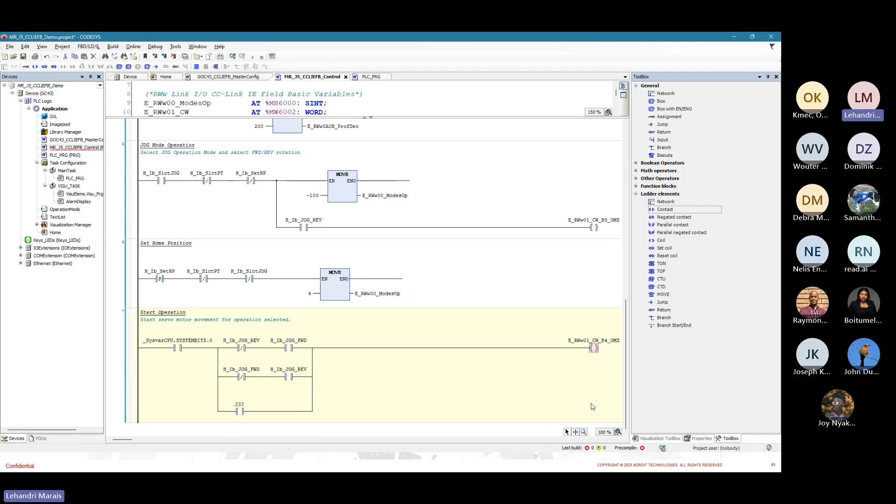However, it will not just set the home position when doing this. You need to activate or turn on bit 4. So the home position will be set on the rising edge of bit 4 when the homing operation mode is selected or is configured. So this means that when my set is pressed, I would like to trigger bit 4 as well. Okay, so that's actually all you need to set your home position for this operation.

But to actually have the servo axis return to home position, that will require the point table functionality that we included or configured there. So just as a recall, we'll be looking at executing this line for the servo axis to return to its home position. So to do this, we'll look at first setting the operation mode to point table, and then telling it to read or put the value -101 into the operation mode, as this is the operation mode value for the point table.

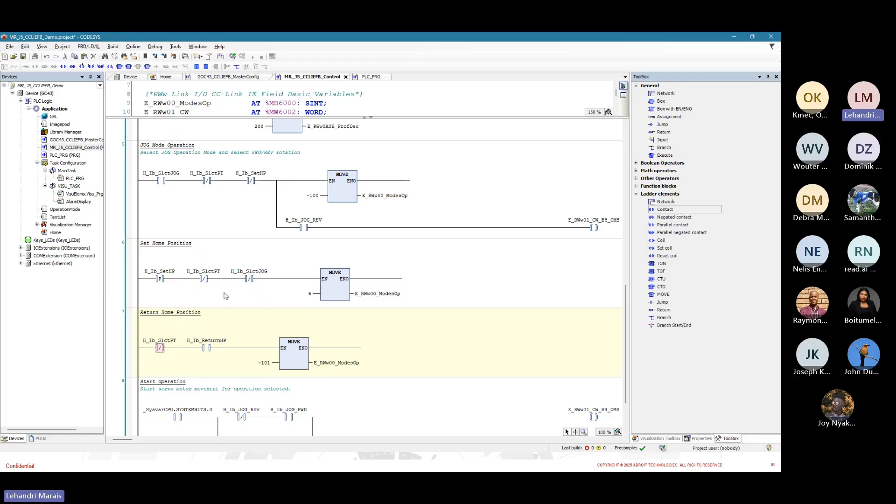Also just adding some interlocks, as we don't want this operation to be executed while any other operations are being executed. Okay. Now, once again, this does not by itself execute the operation, but bit 4 needs to be executed. But before bit 4 is executed, we actually need to tell the operation what row or what point step in the point table needs to be executed. So for this, it will be 11, meaning that we want to move 11 into the target point table variable, which is register

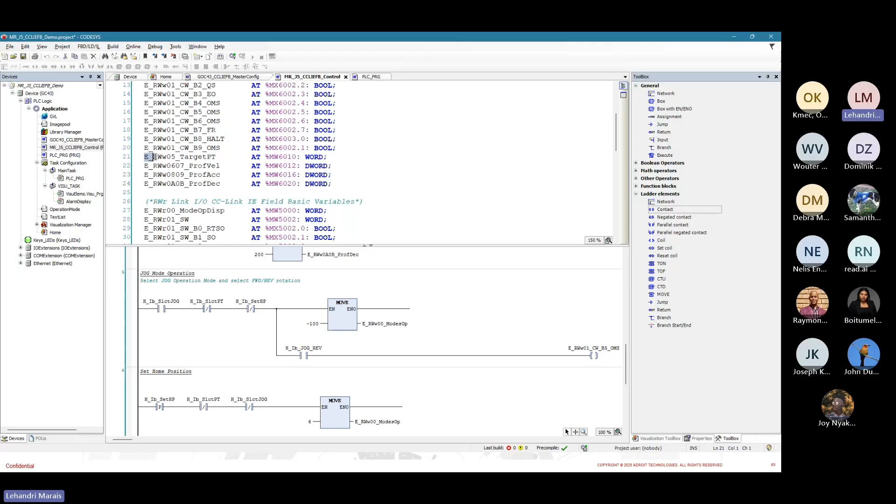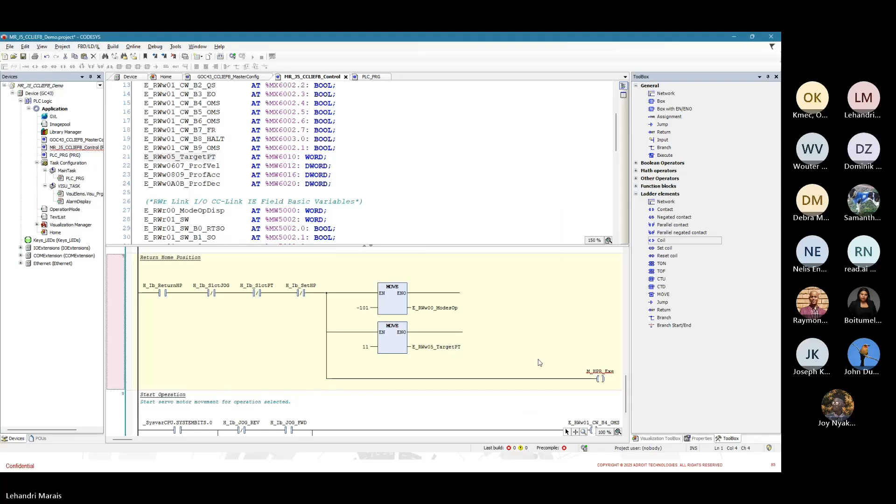RWW05 right there. So this will be using another move in which we'll be doing this and selecting this variable. Okay, incorrect. Okay, so that now points the point table to step 11 for that to be executed once bit 4 turns on. So to add the trigger to bit 4 and make sure that it is executed in time. Wrong one. The following bit will trigger bit 4. So this will then be added to trigger bit 4, which will start the sequence.

So something to note, when the point table operation is executed via turning bit 4 on, the execution of this sequence or whatever movement is set in the point table starts on the rising edge, and you don't actually need bit 4 to stay on the entire time. So we can just pulse bit 4, which is exactly what will be done. Okay, so that now adds the return home command to the PLC program.

And with this being done, we can now start looking at executing the sequences that have been set up in the point table. So this actually works pretty similar to how the return to home position one works. In fact, it works practically the same. The difference being that instead of just executing one step, we have configured the point table to execute multiple steps. So this would be our point table sequence operation, and it will look similar to this, where we would be selecting point table as our mode, and then also just interlocking it so that it can't try and operate another mode or another instruction while this is being executed.

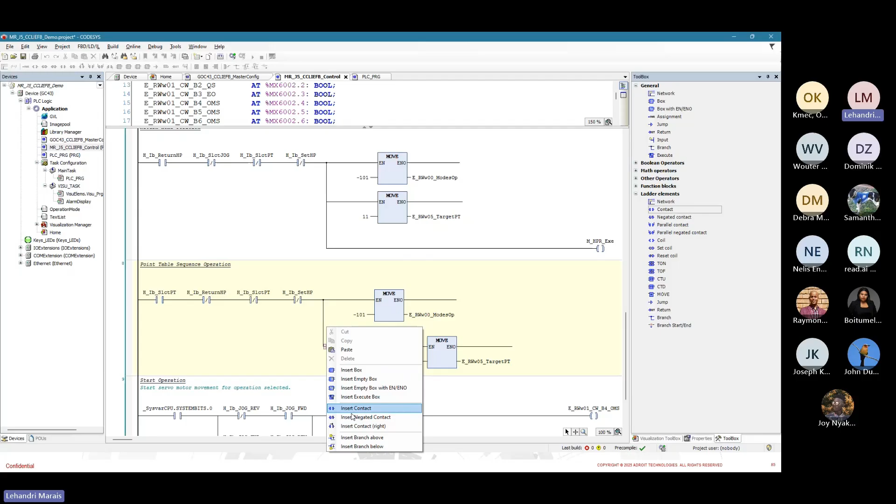Okay, so I want it to run from point 1, which it is set as there. But because I have multiple sequences, there are some things that I need to set. So first, this only needs to execute from this point when I select sequence 1. And when sequence 1 is selected, I need to pulse bit 4 or activate bit 4. And to do this, we'll be looking at doing this, and then adding this here to execute sequence 1.

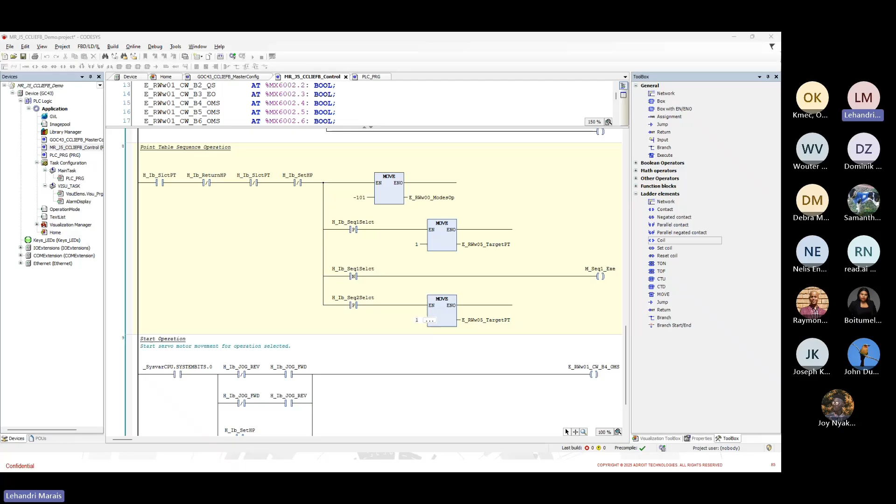Now the same procedure is followed for sequence 2, just changing the point at which the sequence starts. So if I select this one, that's my HMI button, and then choosing what point to start at. So looking at the point table again, the starting point for sequence 2 is step 12, so we'll be moving from there on up until step 20. So setting the start point here as 12, meaning the sequence will begin at step 12.

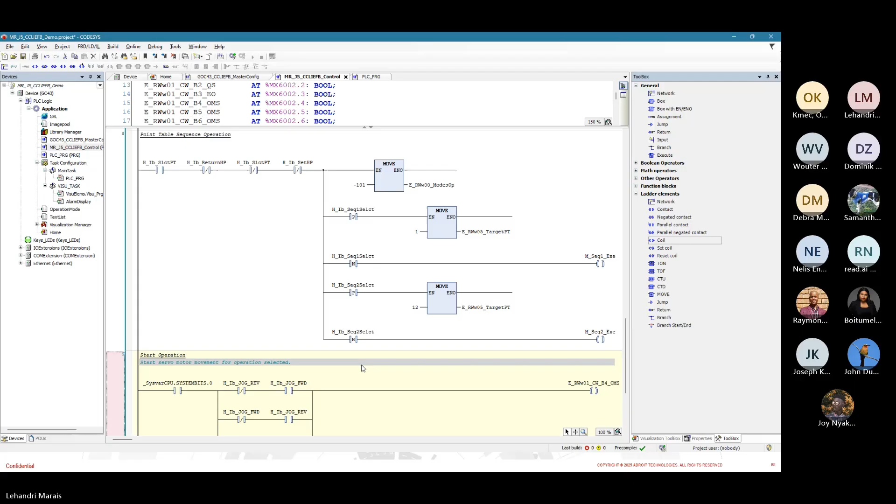Okay, now the same is done as we did here for sequence 1. And we also need to pulse the bit. Okay. So that is actually all the movement operations that we'll be adding to the servo functionality.

Next up, we'll be looking at how to actually reset the amplifier when an error or an alarm has occurred. So to do this, bit 7 in the control word needs to be turned on. When bit 7 is turned on, it sends the reset command to the servo amplifier, which resets the servo amp. Now note, if the cause for the alarm is still active, resetting the servo amplifier will do nothing, as the alarm will just reoccur. So make sure to only reset the servo amp once the cause for the alarm has been resolved.

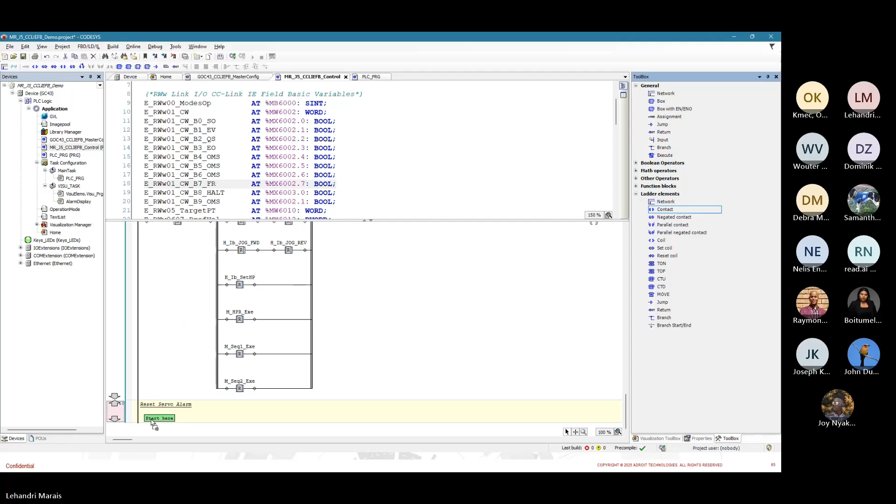So this is pretty simple. It's selecting an HMI button to turn on the command bit for the reset, which is RWw01 bit 7, as such. Okay, so that is the PLC programming that we'll be requiring for this demonstration.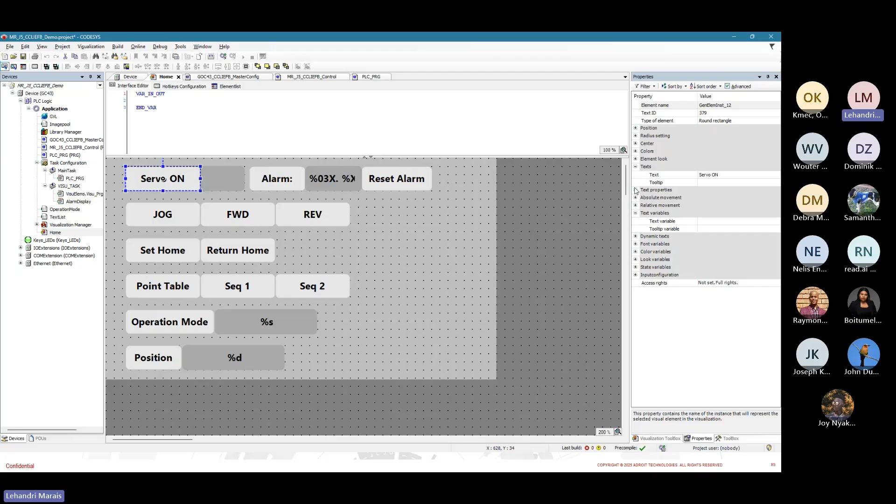Now, I have gone and set up an HMI screen beforehand, as there's a lot of ground to cover for this demonstration, and this just helps to keep us within the time frame. But I'll quickly give an overview of what has been set. So simply, this is the Servo On HMI button. That's where you activate the Servo On command. And this is the lamp, which turns on green when the status reflects that the servo amp is on.

Okay, I'll be coming back to the alarm in a bit, because that is purely on the visualization side. Now, next is the jog selection, forward and reverse rotation. So how this has been set up: the jog button is a toggle button that selects the jog operation mode, and the forward and reverse buttons, if you recall from the PLC program, activate the forward or reverse rotation. So these are momentary buttons, meaning the contacts will only stay on for as long as you are pressing these buttons.

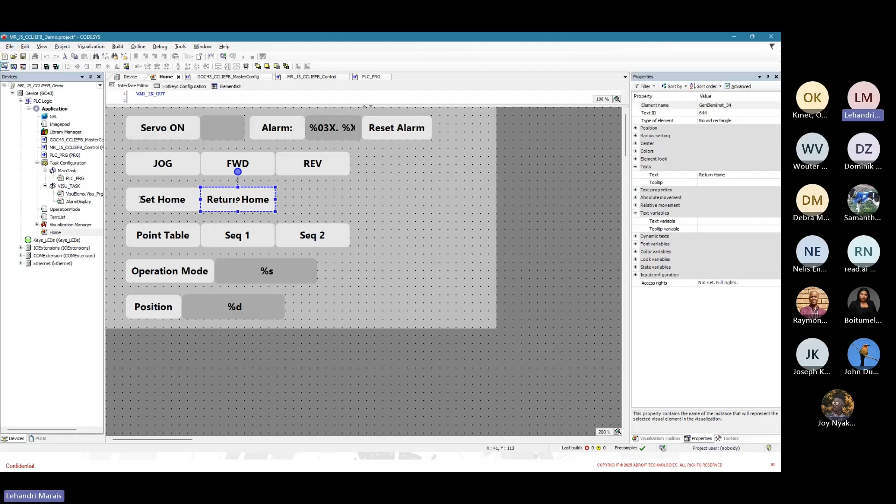Similarly, the set home and return home buttons are also momentary, or tap as they are referred to within CODESYS. So they only stay on for as long as you tap it, but this, when pressed, sets the home, and causes the servo axis to move to its home position when the return home button is selected.

Next, the point table button is similar to the jog. When this is pressed, the point table mode is selected, and this is also a button that is toggled. So when that is selected, you are able to press sequence 1 or sequence 2 for either sequence to be executed. These are also momentary buttons, so the contact's only active as long as you are pressing it. Now, for the reset alarm, that HMI button in the program turns on when this button is pressed, and it's also a momentary button.

Now, to point out the three things that didn't require any PLC programming and are purely represented on the HMI side of things: the alarm, the operation mode display, and the position. So for the alarm, there is a read link register. I think it's register RWR 12 and 13 that stores the current alarm value. Now, this is a double word, and it does store the value in hex. So keep that in mind.

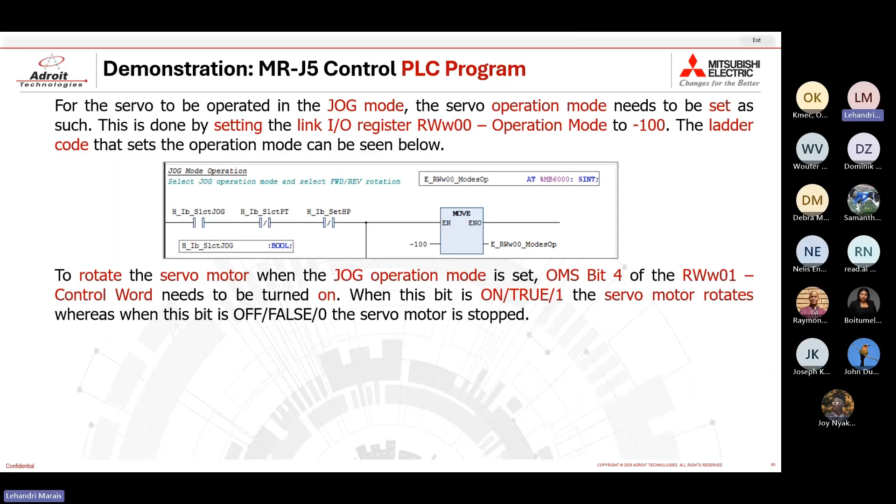Meaning that the register needs to be split in two. So to do this, the most significant word and the least significant word of this register need to be attributed to the correct side of the alarm, in which case the most significant word will be the value before the point, and the least significant word would be the value after the point. As such, it is configured to display on the HMI screen by using two different display objects.

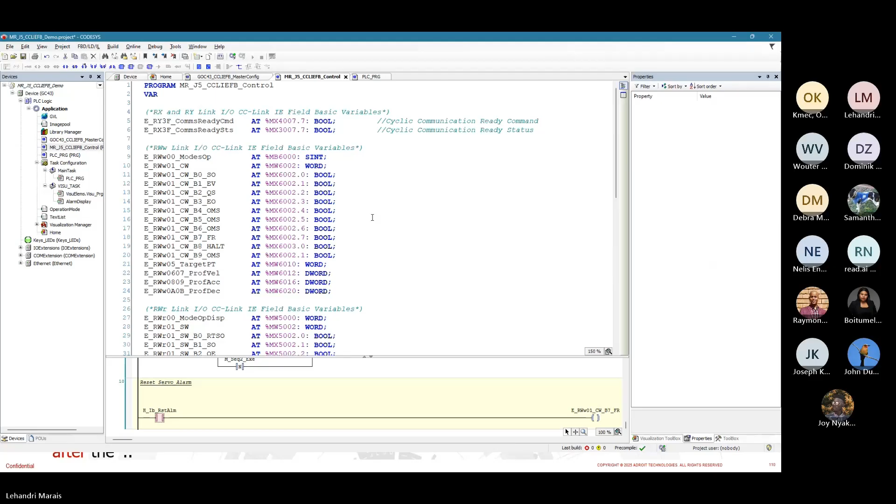Now, when it comes to the operation mode, there is a register in your RWR, register 00, that displays the mode of operation. So it gives feedback from the servo amplifier to the GOC to indicate what mode the servo is actually in. And this is displayed via dynamic text on the HMI screen. And to do this, a text list is created. So if I go to my device tree on the left-hand side, you'll see there's an operation mode text list.

So basically, the IDs of the entries are set to the values that will reflect what operation mode the servo motor is in, which is -101 for the point table, -100 for the jog mode, and 6 for homing method. And when the value of the variable set is reflected by one of these IDs, the corresponding text in the default column is displayed. So if I go to my dynamic texts configuration, you'll be able to see that I've set the modes of operation register there. So that means the value reflecting the operation mode will determine what is displayed in this visualization object.

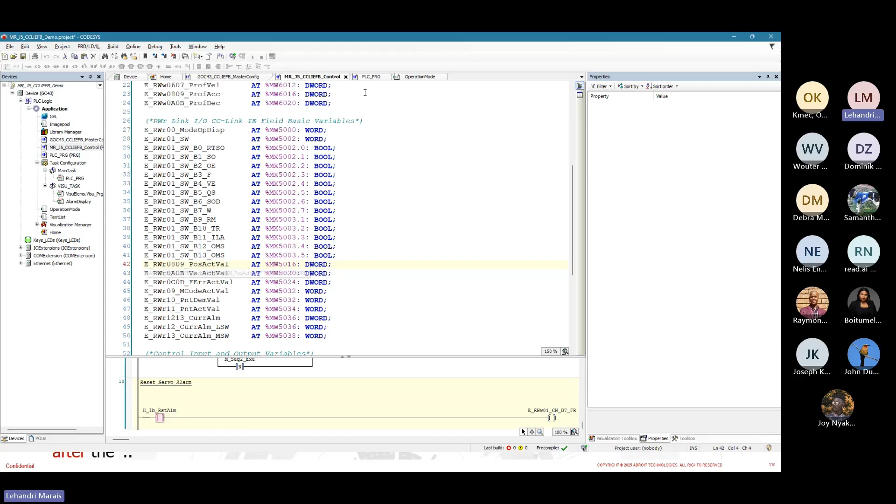Last but not least is the position of the servo motor being monitored. This is monitored via the position actual value register, which is RWR08 and 09, so also a D word. And once again, this will be in terms of pulses. It's quite simple. This variable is just configured to display in this visualization object. If you do want to see the exact configuration of each of these visualization objects, they are detailed in the presentation. So yeah, you'll be able to recreate the screen via the presentation, which I will be sharing once we are finished.

Okay, so that leaves us with actually building and downloading the program to the GOC to test whether this is actually working. So my build and rebuild, let's check. Doesn't seem to be bringing up any errors. So I'll now be looking to download my program to the GOC. Okay, so the program has asked me to download, which I will do. Once it's downloaded, the GOC first needs to be set to run mode via the play button you see right here. And then I will be pressing buttons on the HMI screen, but I will be showing you the actions within the PLC program code.

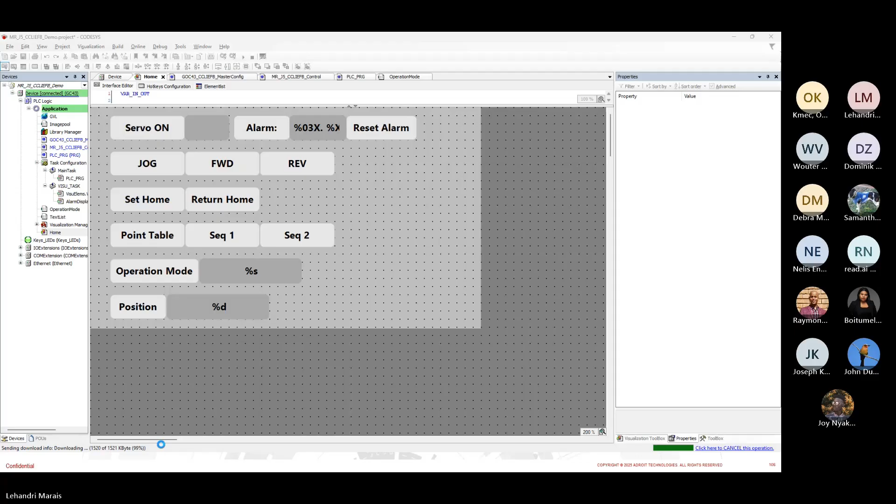Okay, seems like the download is finishing up. Now you can see it is currently stopped. So pressing play will now start the program running. Now, first up, because I disconnected the communication between my servo amp and my controller, the servo amp will actually go into error because it's no longer able to communicate with my controller, which if I quickly check, you'll see the alarm there.

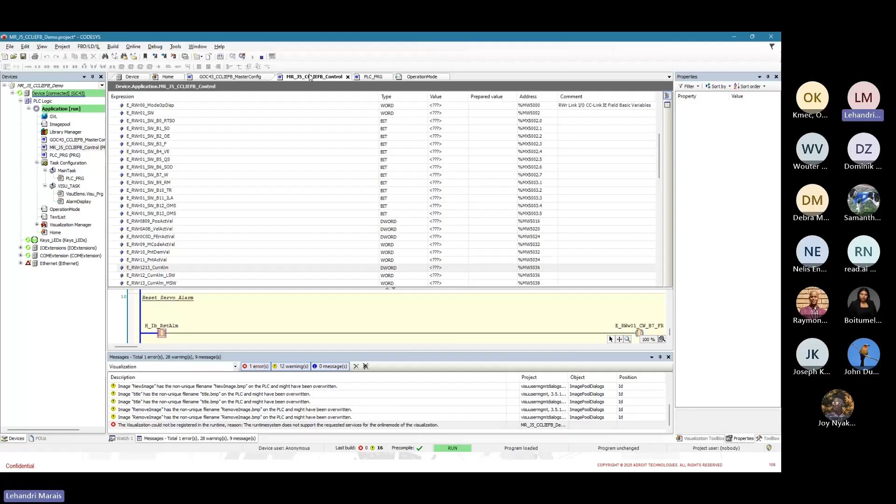Although the alarm that is displayed on my screen is in hex, as this is generally how the alarms for the servo amplifiers are coded, it displays 086.1. So that would be the alarm that you go look up in your manual. So first up, the alarm needs to be reset. So looking at the ladder code for this, if I press my reset button, you'll see it turn on. And when I now try and look for the alarm code, you'll see that it is now 0.

There, it's 0. And if I also look at my status bit for my fault, which is bit 3, it is also false. So if I look at my current position, which is position actual value, you see that it's currently on 75 pulses. So this means it is 75 pulses in the positive direction away from home position. But let's say I set my home position where it currently is when pressing the button. Let's just make it so that you can see the ladder code as well.

So homing, yes, set home position. So when I press, you'll see the mode of operation value going to 6, and you'll also see this position actual value go to 0.

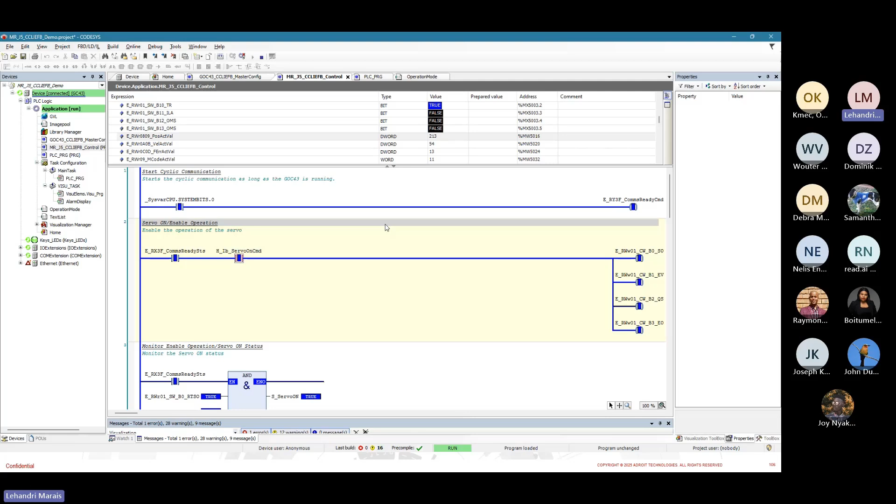Sorry, apologies. I forgot one crucial step. The servo needs to be turned on, otherwise I can't actually command it. So you're able to reset the servo amplifier without the servo on command, but you can't command it to do any movements. So first up, let's actually do the servo on. So you can see the servo on going, turning on, and the status coming back that the servo has actually turned on.

So now that that is done, we can actually set home position, which you can see the actual value change to 0 now. And you can also see the mode of operation has changed to 6. So first up, let's try a jog operation. So if I select my jog mode, so select the jog button on my HMI screen, you can now see the operation mode change to -100, which is the jog operation mode.

So if I now click my forward button, you can see the actual position value change. So if I just quickly scroll down to bit 4, you'll see the bit turning on as I press. If I do the reverse rotation, it looks similar for bit 4, but if I go back up to my jog operation, you'll see bit 5 turn on because I am now instructing it to rotate in the negative direction.

Okay, now deselecting jog mode, I now want to have my servo axis go back to home so that I can actually start my sequences. So to do this, I just press the return home button on my HMI screen, and you'll see this changed to -101, this changed to 11, and you'll see the position actual value change until it ultimately reaches 0. You'll see it's still adjusting, but it is now returned to 0, so home position.

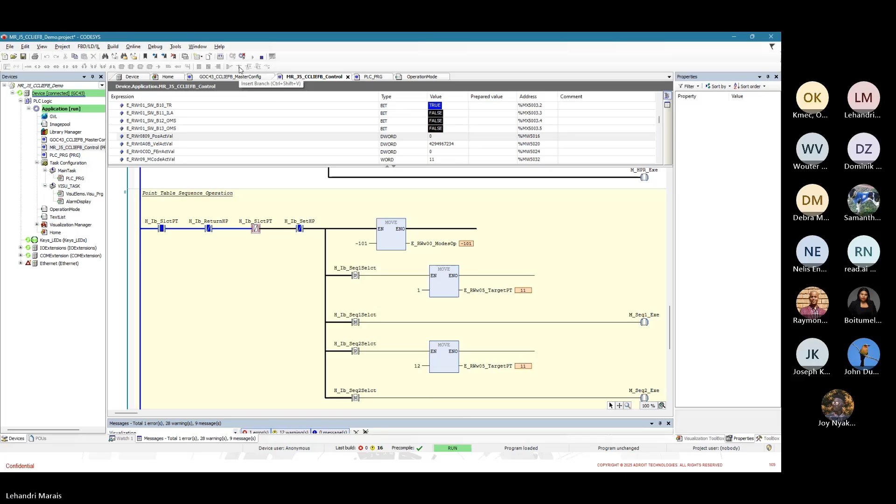Okay, with home position set, let's try and do a sequence. So to do this, I select point table as my operation mode via the HMI button. Okay, that's a mistake actually. So apologies, this interlock is not supposed to be there. It's actually stopping the thing, so let's quickly redo this. I can go show the sequences of the point table.

So the download is completed once again. So once again, the fault should be on because the communication was broken. Yeah, so see the fault bit turn on. When I reset it, it will turn off, and then also turn on the servo on command. And because it turned off, I'll just have to return it to home as well, which it now is. Let's see where the current position is.

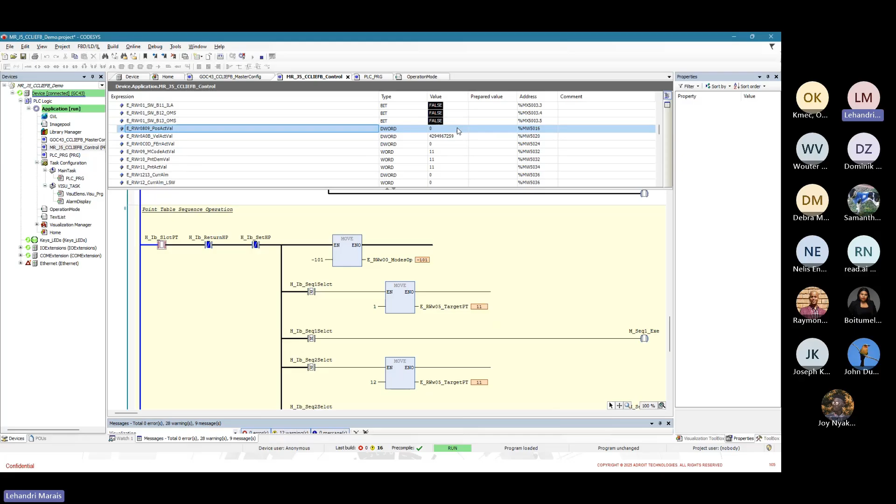Okay, position actual value. So when I now once again select my point table method, you can see it changing to -101, but I have not selected which sequence I want to execute yet. So depending on what sequence button I press, it will select that starting point. So starting off with sequence 1, you'll see position moving, and it will ultimately go back to 0, as that is what is set up in the point table. And that completes sequence 1.

So if I now select sequence 2, it will now start that sequence, and you'll also see this change to 12. Okay, change to 12, and it's currently moving according to sequence 2. Okay, and that is sequence 2 complete.

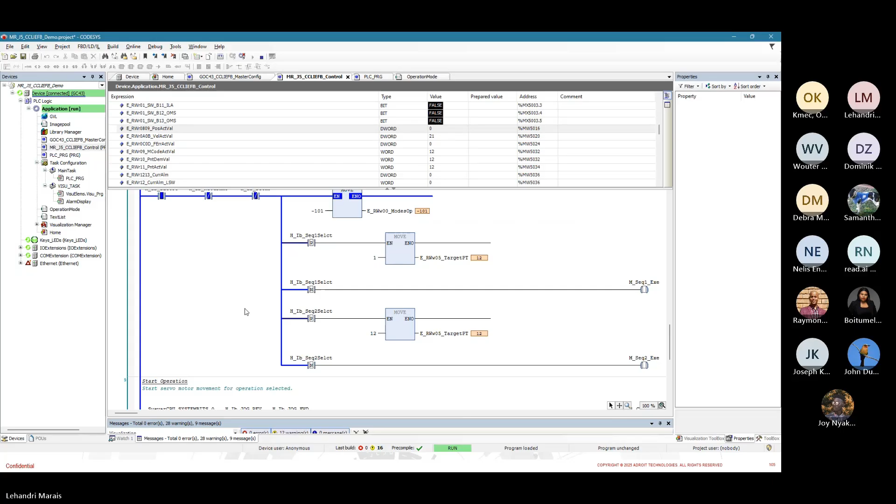So that is actually all for today's demonstration and webinar. So are there any questions regarding today's topic?

In a table of movements, how many positions can you have? Is there a limit? Yes. I think it's 256. 255. Well, yeah, okay, 255. So you have to be quite stingy with these things. Yes, relatively. Any other questions?